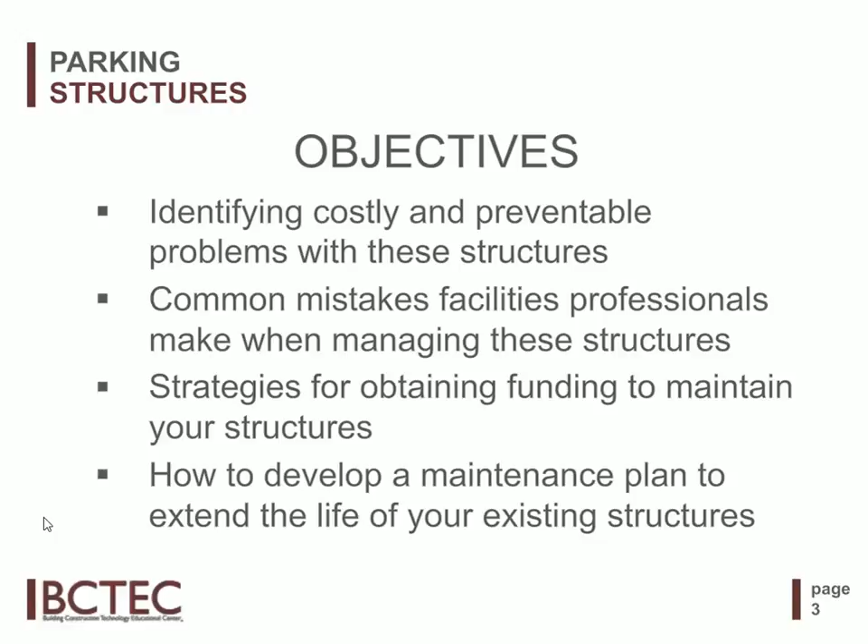So that's what Russ and I want to do. We really want to make sure that we're totally clear on the common challenges, so preventable problems that we're experiencing with these structures. We want to look at some common mistakes that facilities professionals make in the management of these structures. And we want to look at strategies for obtaining funding for these structures. And then ultimately, to close it, we want to look at how to develop a really solid maintenance plan to extend the life of these structures.

and they have many factors or conditions that are common to each other. Some of the commonalities that we see is, as I said, they are often intermixed, they are multi-use. They also have extremely aggressive deterioration environments. We salt them like crazy to keep people from slipping and falling. They're exposed to any weather that we have out there. This also results in similar problems and similar repair needs.

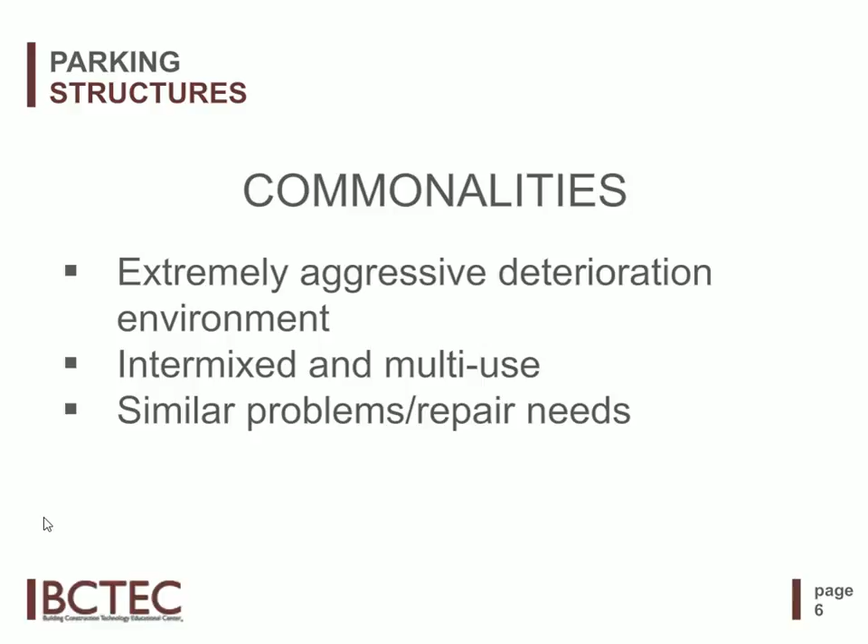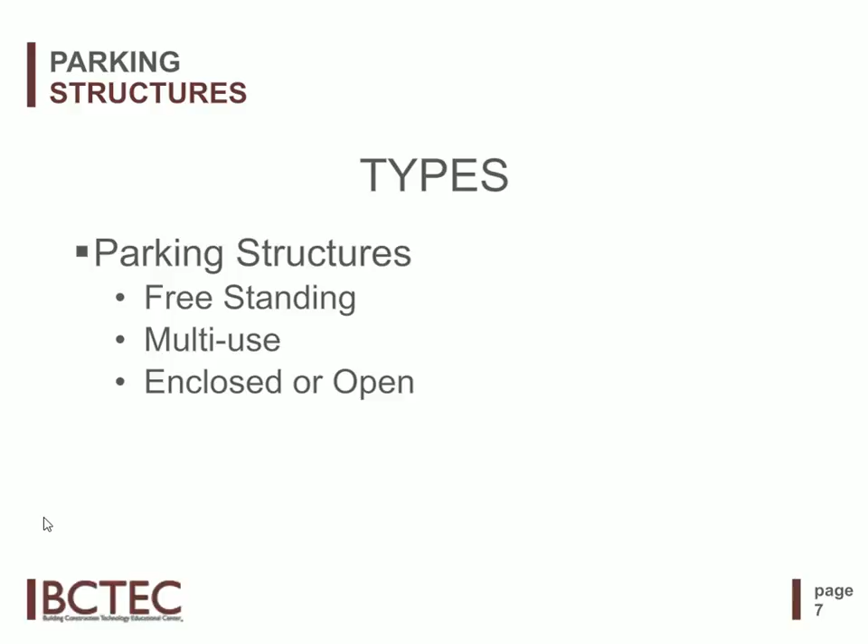So starting with the parking structures, there's a couple of different types. There are the freestanding ones, which are basically on their own. They may occupy a whole city block, a half a city block, whatever, but they are parking ramps, as they're quite often considered, single-use parking only. Other types are multi-use, where other office space or retail or some other use may be incorporated into it also.

Along with that, they may be either open or closed, and what that affects primarily is what the ventilation requirements are for them. Some of the factors that affect which way they go may be the land cost. If it's an urban setting, multi-use are more common now. Age: open freestanding parking structures were common many years ago, but with the land costs it's hard to justify that. Code compliance may require multi-use. The retail demand may require that there be more retail at grade level and so forth. Architectural influences can also affect that.

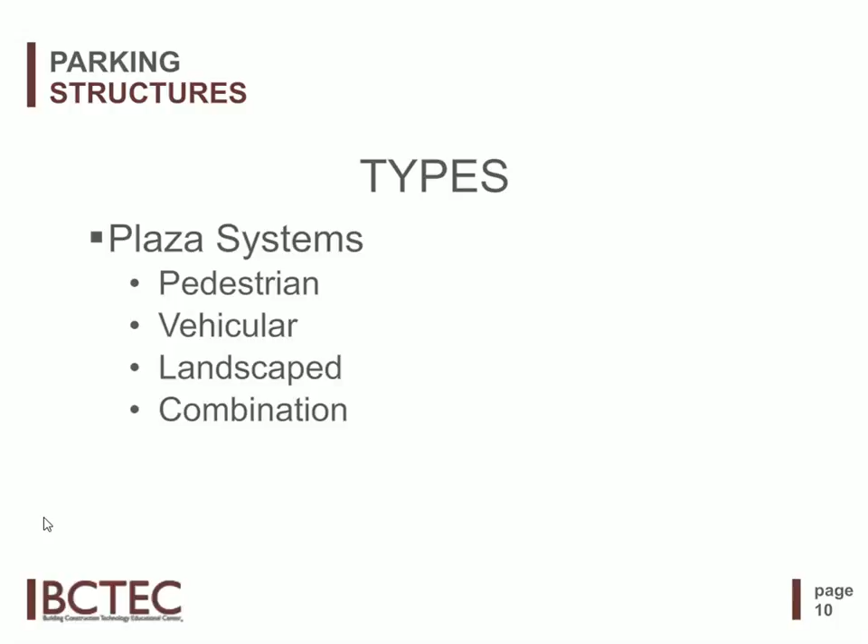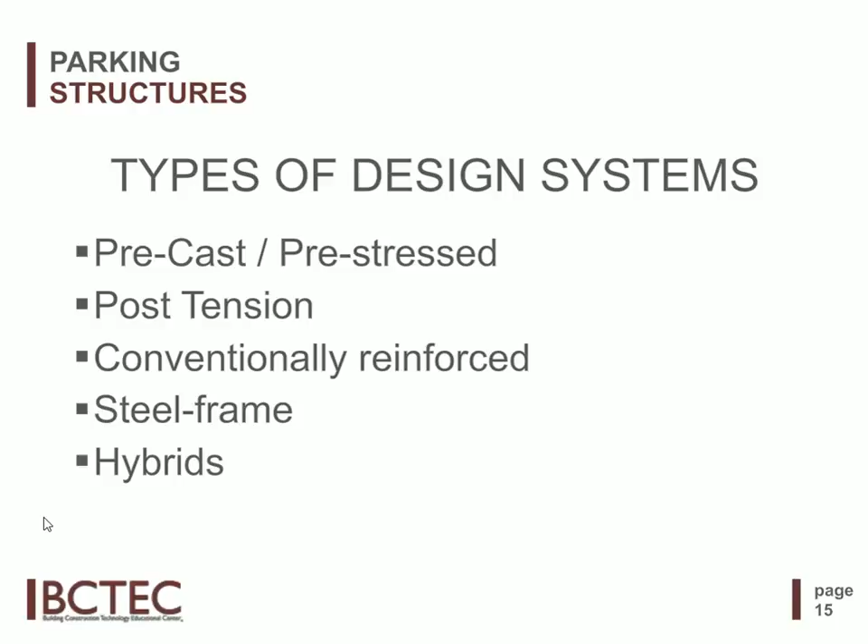Typically, these are a maximum of 30 by 30 foot grid on the columns. They're quite often used where there's office space above, hotel space above, where the column locations for the structure above may dictate the need for where they are down in the garage. These typically are very thick floor slabs, 8 to 14 inches thick. The reinforcement goes in two different directions. And as I said, it's common in older structures or under other structures.

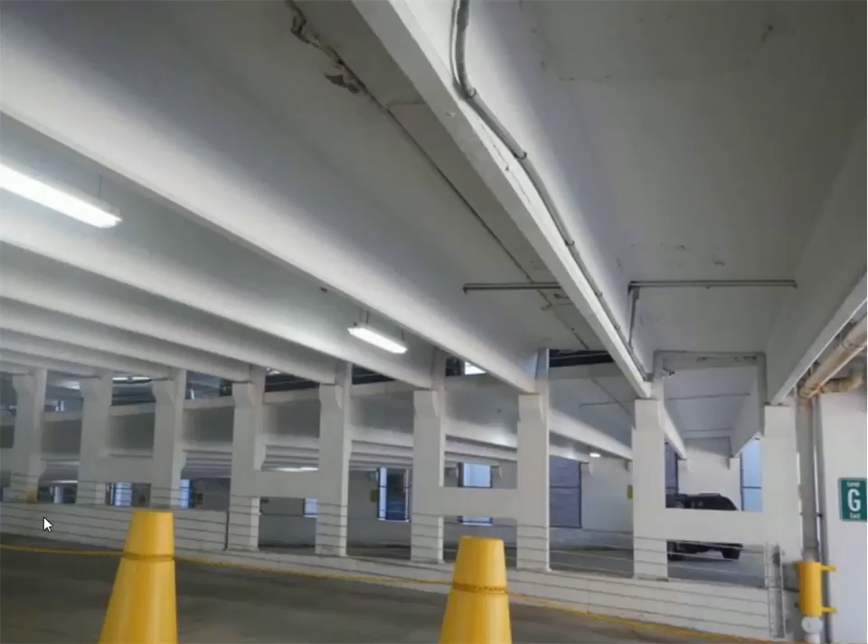This is a precast garage. Precast means that they are individual units that are pre-manufactured elsewhere and shipped to the site for assembly. There's many welded and bolted connections. There may literally be miles of joint sealants in these garages. They typically are a 5 to 6 inch thick floor system. Easiest way to think of these is giant Tinker Toys.

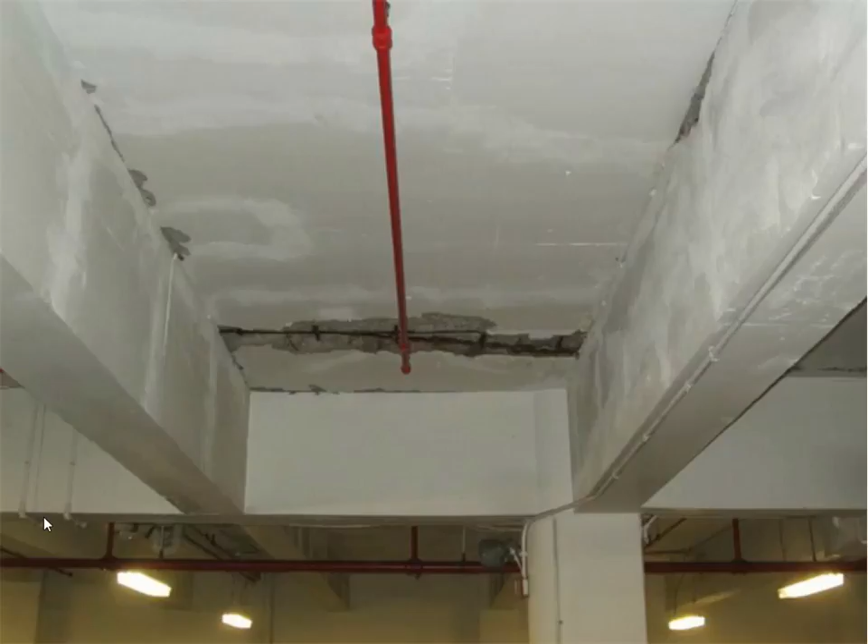This is a cast-in-place beam and slab system, conventionally reinforced. These are identifiable by the close spacing on the beams. These are generally in the 8 to 12 foot spacing on the beams. The floor slabs are generally in the 5 to 8 inch thick range. Conventional steel bars are used to reinforce the floor slab.

That's as opposed to this, which is a cast-in-place post-tension reinforced beam and slab system. The biggest identifiable feature here is the much wider spacing on the beams, which opens up the feeling of openness in the garage. You're looking at 20 to 30 foot spacing on those beams. Makes it much easier for light distribution and so forth. These include a high-strength cable buried in the beams and tendons to achieve that.

So some of the common problems that we see in both plazas and parking structures are leakage, concrete deterioration, and salt contamination. And these are actually all interrelated. We'll be seeing more in a minute, but the leakage brings salt into the concrete. The salt in the concrete accelerates deterioration, and it becomes a vicious cycle as the deterioration becomes worse.

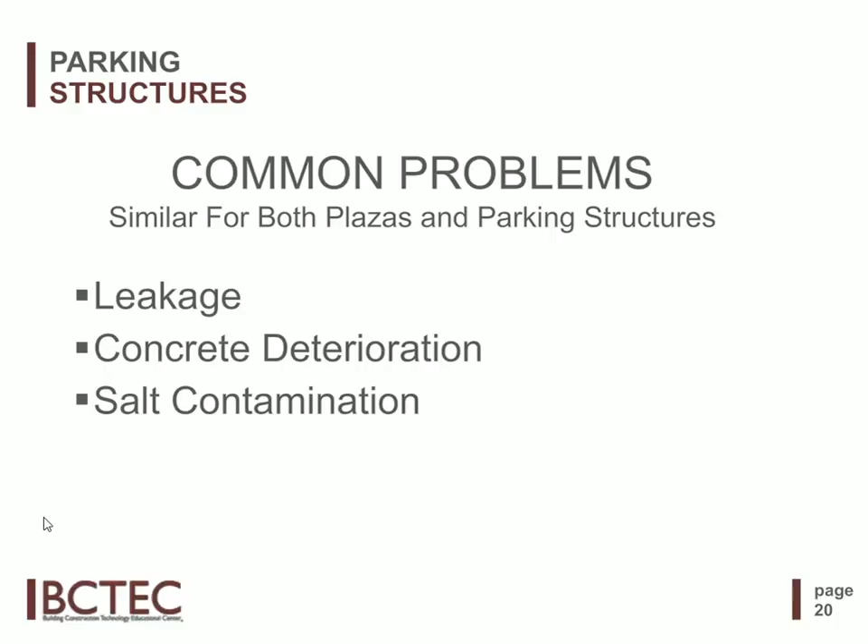Here's a quick overview of some of the types of deterioration. Joint sealant failure. Joints can fail either at the bond, which is an adhesive failure, or within the joint sealant itself, which is a cohesive failure. This can result in leakage down into lower portions of the structure.

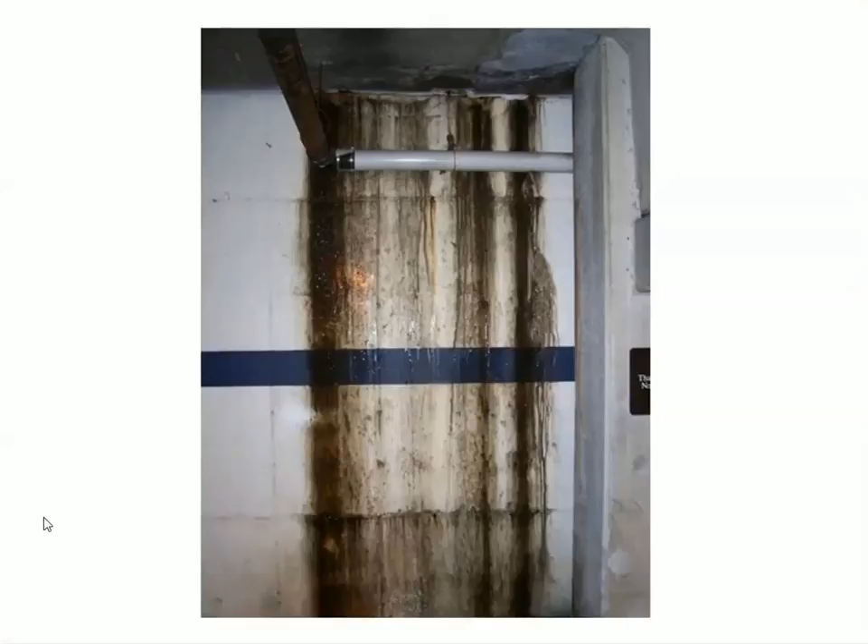The leakage can actually occur at failures within the concrete itself. This is through-slab leakage at fine cracks in the concrete. By the way, this is also an example of another type of beam and slab. This is called a pan joist system, very closely spaced, maybe 2 to 3 feet apart. But you can see that there's actually enough leakage going through there to cause small stalactites to form. Yeah, now that's not recent leakage, Russ. That's long-term ongoing leakage.

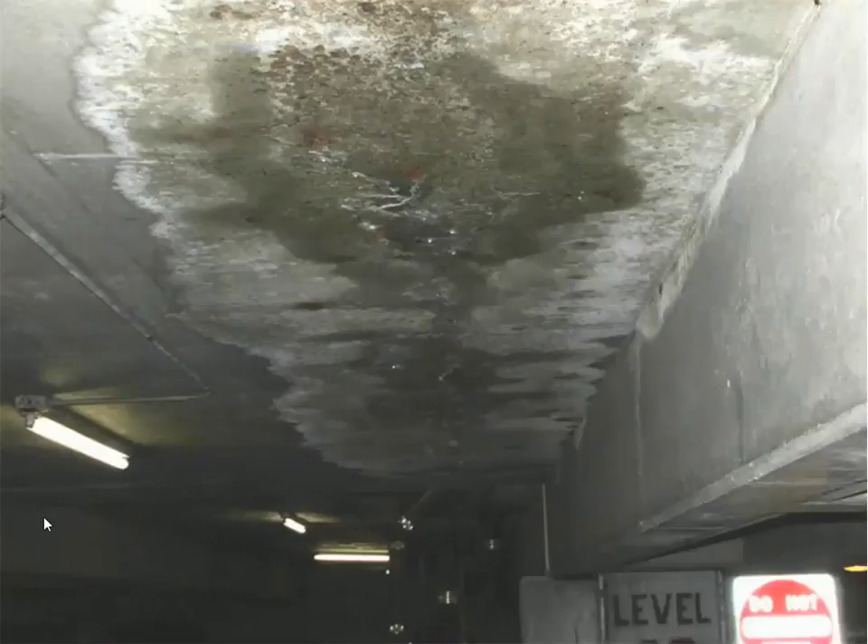A symptom that you may see sooner than that is something like this, which is large area staining on the underside of a floor slab where moisture is coming through fine cracks and so forth, and contaminating it with salts that leave a residue on the surface when the water evaporates.

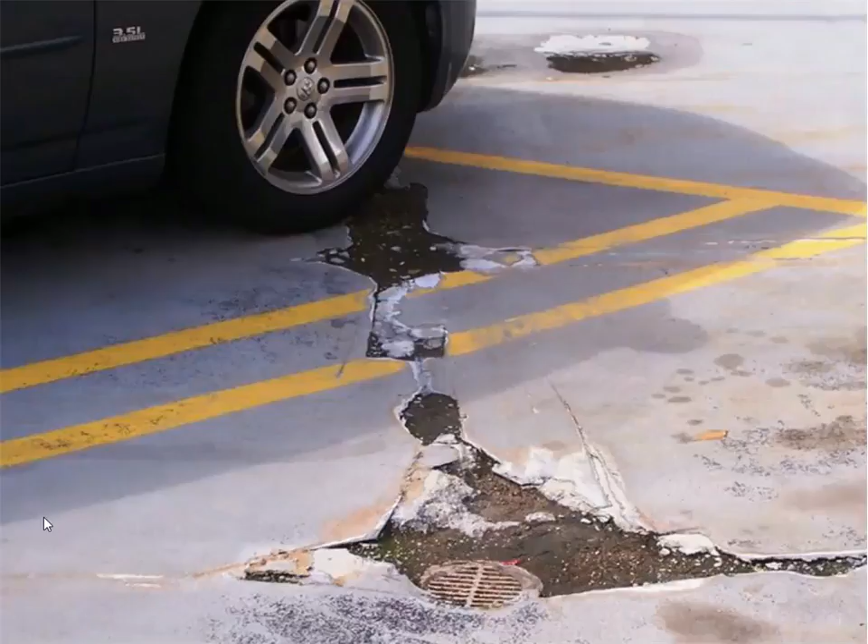So where's the water coming from? You start getting deterioration on the top side, you get cracking. Deterioration like this will act like a reservoir and hold water for a long time, which promotes the water to work its way out through the floor slab. Unfortunately, at this one, the deterioration occurred right at a drain, so the water didn't get a chance to even get into the drain. Now, is there a reason for that, or is it just a coincidence that it's around the drain?

If the drain was set so that the water could not get into it real easily, the water would tend to saturate into the concrete, cause freeze-thaw damage, cause corrosion damage, and progressively become deeper. The drain may have been only an 1/8 to a 1/16 inch above the surface to start with, but as the deterioration progresses, it turns the concrete around it into rubble, which acts like a small lake. So we really need to make sure that there's positive drainage, good drainage. Absolutely.

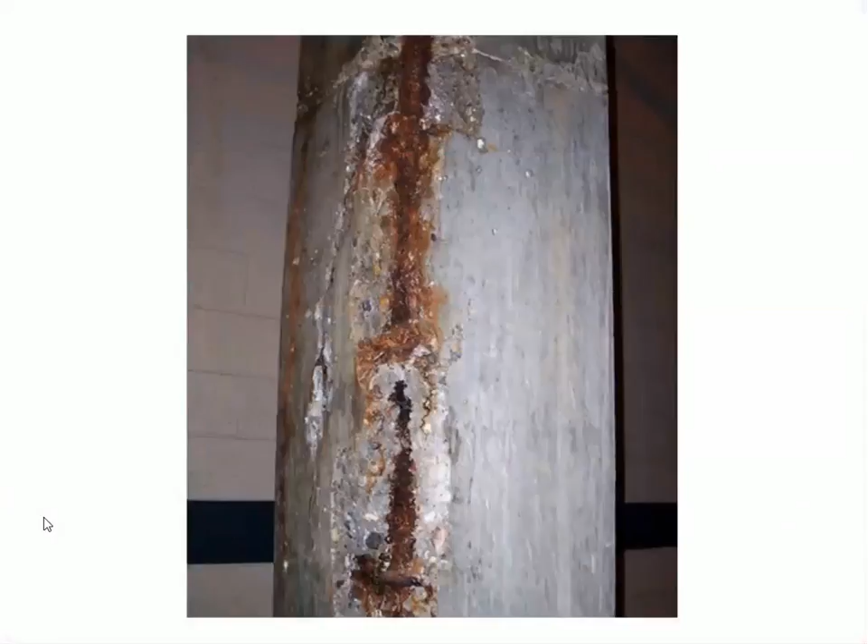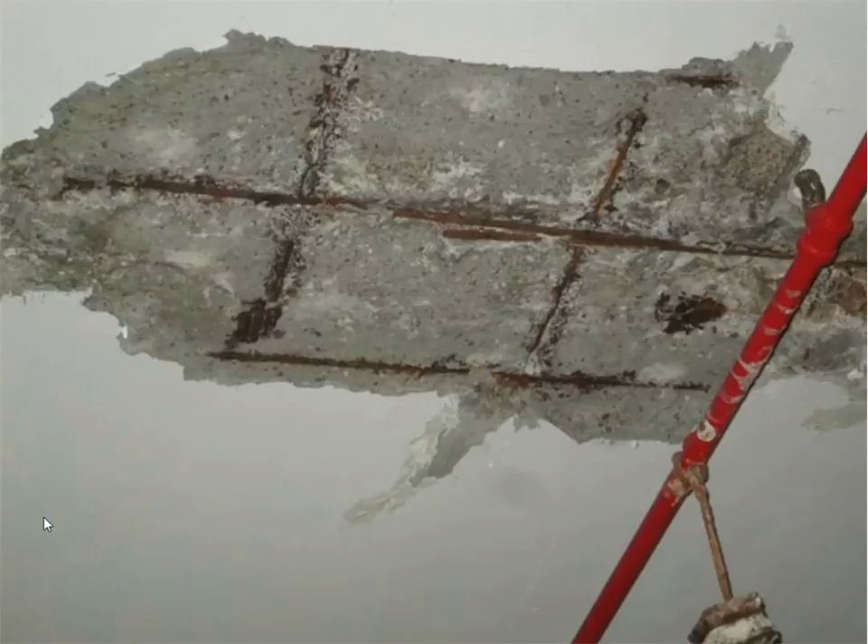The long-term effect of these is that the water coming through the slab starts to affect other structural elements. It can affect the beams, like you saw in some of the other pictures. It can also migrate over and start affecting columns and corroding reinforcing steel in the columns. In here is water coming through to cause corrosion of the bottom reinforcement in a floor slab, which is effectively the ceiling of the floor below. Some of this concrete had fallen out, some of it we ended up taking out as a safety precaution.

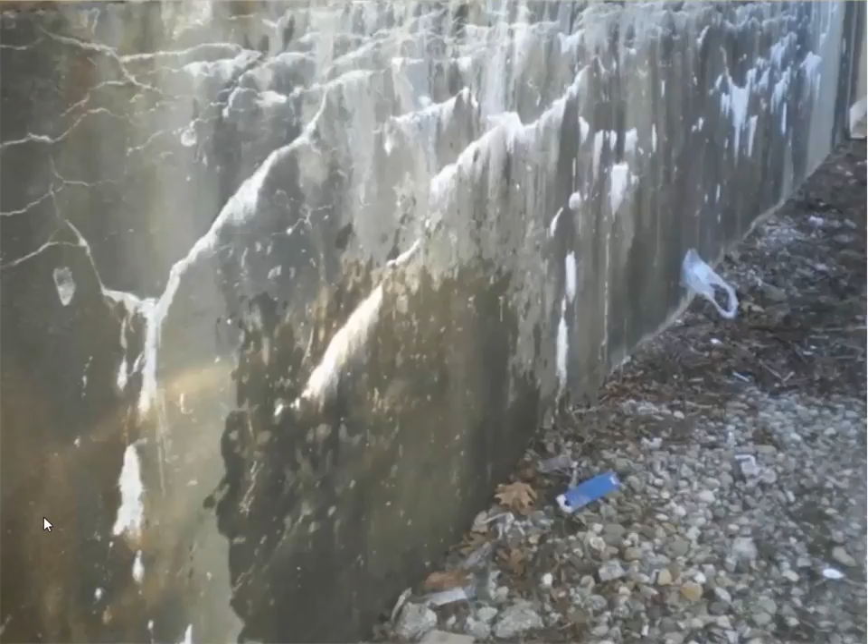Another form would be freeze-thaw deterioration. When moisture gets into it, it causes fine cracking when it freezes and expands. In the southwest, a very similar appearance can also come from a chemical reaction with the aggregates called alkali-silica reactivity. Very similar response as far as the deterioration of concrete.

So Russ, most often when problems seem to be noticed, or at least when we get brought in, it's when there's drips, those active leaks, right? Drops, which could be some of those concrete deterioration issues. You've got falling concrete, or an occupant going to and from the parking structure trips and falls. So really those are the three key areas where we're really starting to notice these problems. Yeah, if you think about it, that quite often is also the point at which lawyers are called. That's a good point.

So, why aren't problems noticed earlier or addressed earlier? As far as why they're not noticed earlier, they are quite often hidden. They're not always that noticeable.

Parking structures, the way they're laid out, people very easily become disoriented as far as exactly where in the garage they are. So even if they want to report it, they have difficulty telling you where it is. It's also not a destination for most people. It's just where they're going to put their car on their way to doing something else. It's essentially a utility. It's very easily ignored.

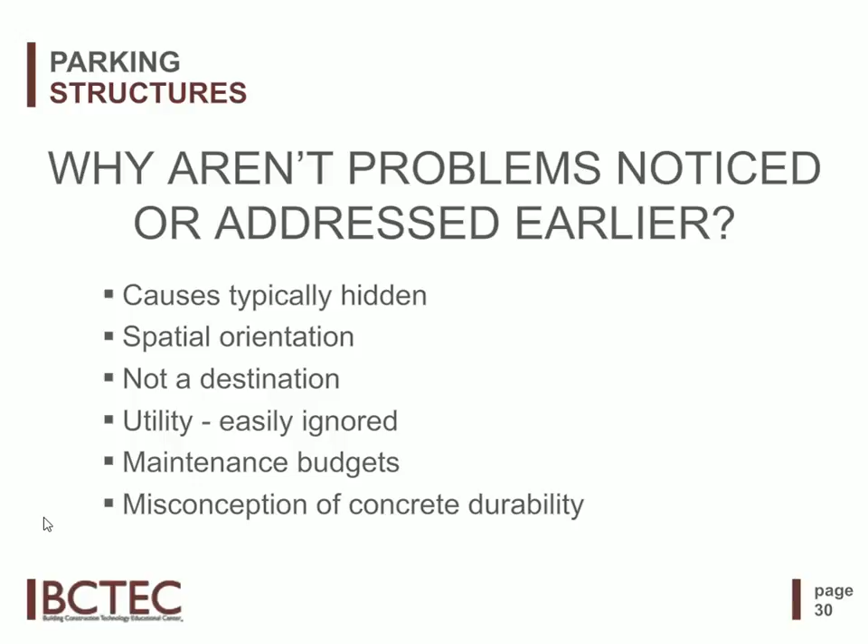As far as why it's not addressed earlier, that usually gets down to two items: either maintenance budgets or misconceptions about the long-term durability of concrete. Despite people knowing that it does deteriorate, there's still a very common thought that it's made of concrete, it'll last forever, and it doesn't.

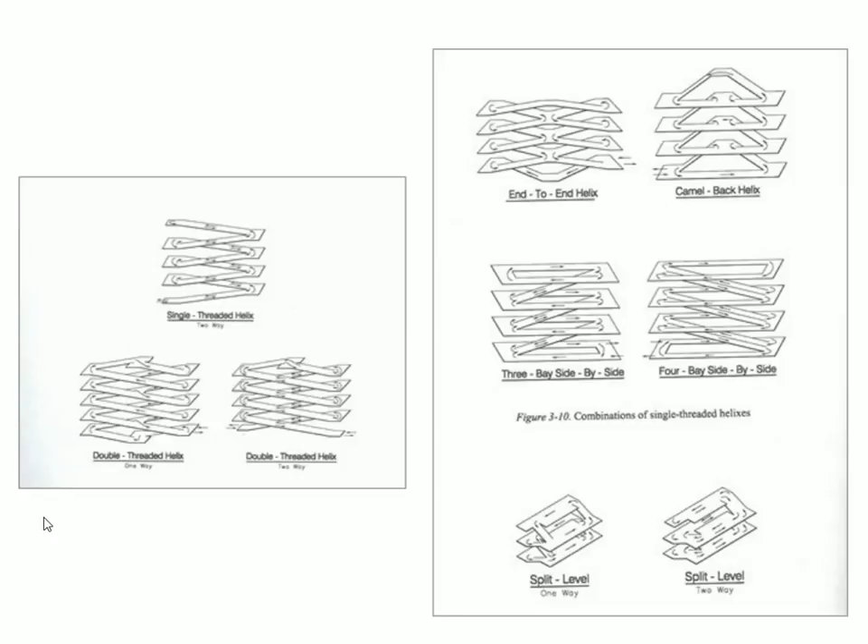Just a quick example of some of the different layouts that can be found in parking garages as far as why people can be disoriented. Some of the most common types include single-threaded helices, double-threaded helices. There's even triple-threaded helices. There's side-by-side helices, camelbacks, end-to-end helices, split levels, all kinds of configurations that are all considered standard and typical and easy to get lost in. Yeah, it can be very complex, very confusing.

Russ, I probably shouldn't mention this, but so confusing, in fact, that even when you and I were visiting that large hospital, parked in that big parking structure to do the evaluation, even you and me, Russ, you're a 30-year parking consultant, structural restoration consultant, it took us 15 minutes to find it. It was pretty complex. But thank you for reminding me of that one. Yep. I almost managed to forget it.

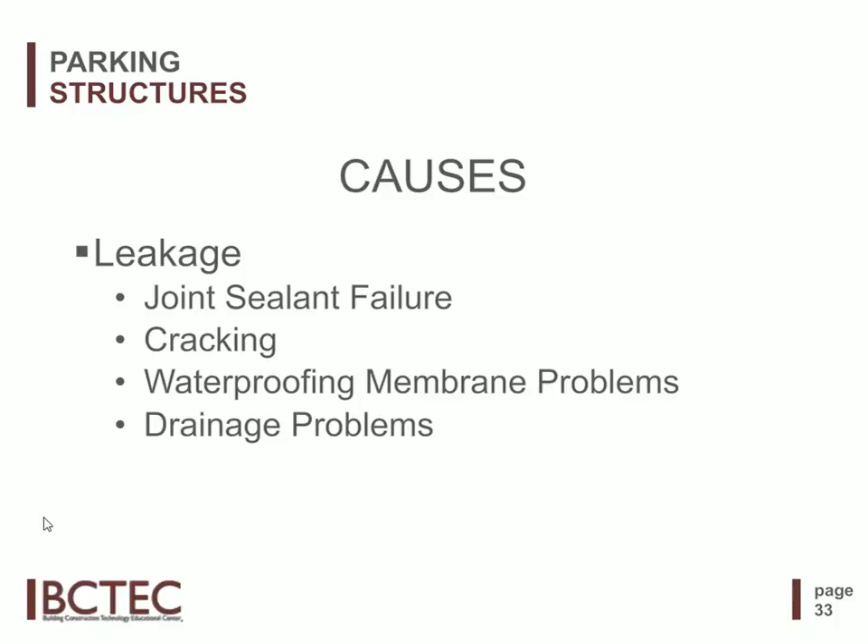Continuing on, what are some of the causes of leakage? Can be joint sealant failure, could be cracking of the concrete itself, could be problems with waterproofing membrane systems, or as we saw in some of the other pictures, drainage problems. As an example of a joint sealant that has totally lost bond, so it's an adhesive failure. There's no bond on either side. You can pick it up with your fingers.

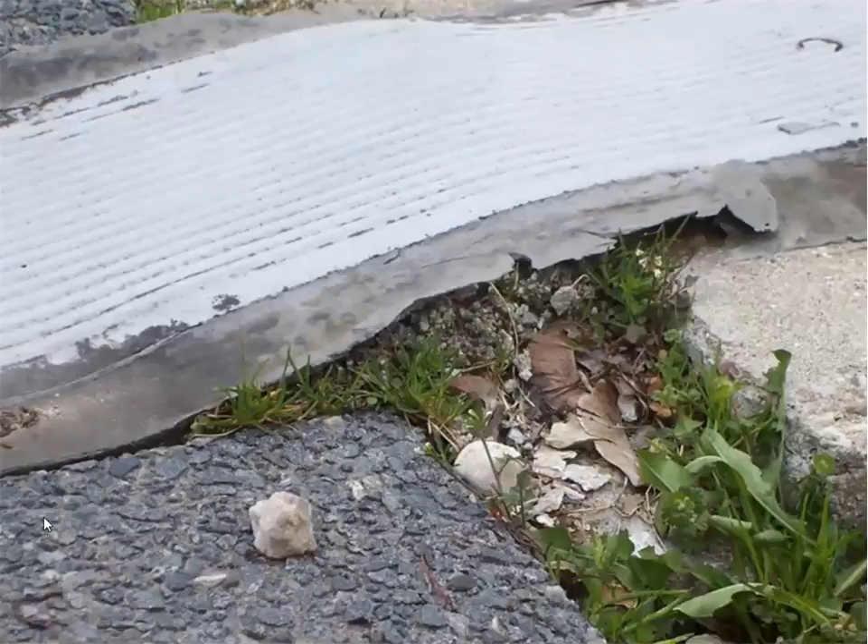This is an example of a joint sealant that has cohesively failed, which means it is split down the middle. And this is an example of one that was just absolutely put in wrong. It actually is spanning between two different sections of two adjoining garages that had soil in between them, and they tried to span across the two systems, over the soil, and into the next one. Interesting.

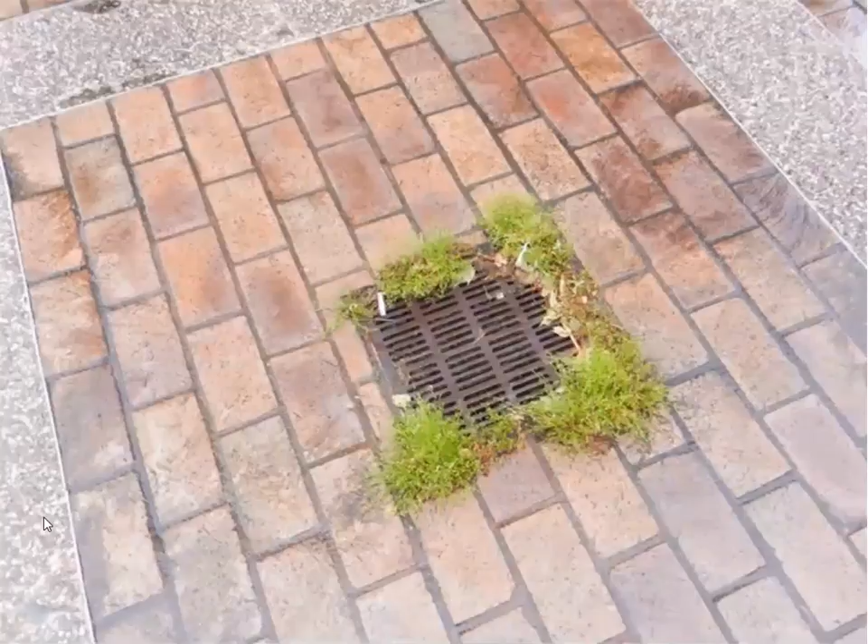As we said earlier, drainage problems create reservoirs of water that exacerbate the problem by keeping the water there for a longer time without draining away. In a plaza system, this is a good example of how you can tell if you have problems with drainage within the plaza system itself. If vegetation can grow up through it, the plaza is holding moisture down where you're not seeing it, and that's what's feeding the roots. So this wasn't like a LEED movement or sustainable movement? No, it was a hidden condition. Most of the rest of the plaza still looked good, but these indications were showing up all over the place. Interesting.

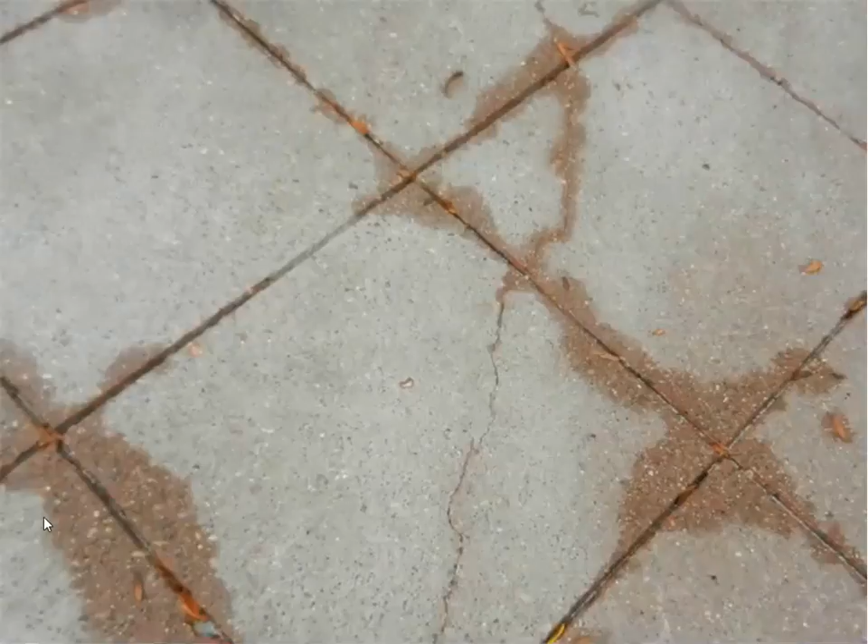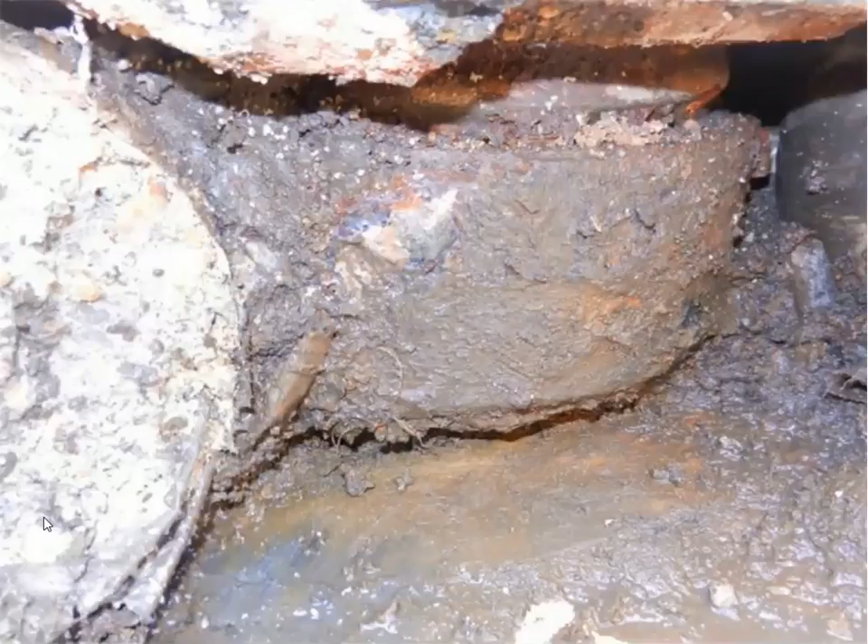The sources of the water may be joint problems. It could be fine cracks. It could be within the drain system itself. This particular one, they were having problems with the drainage. We did some test openings and found that when the drains were installed, in an effort to protect the drain when they poured the concrete, they wrapped the sub-level drainage with burlap and plastic and left it there when they poured the concrete. So it totally blocked off any access of the water down at the membrane level from getting into the drainage system.

Other problems can be not tooling joints soon enough or not placing them quite over where you need them. So you end up with a parallel joint running right alongside the joint you put in. You could also have problems with not having adequate numbers of joints. Concrete, when it cures, naturally shrinks. That's why we put joints in very large structures, very large pours.

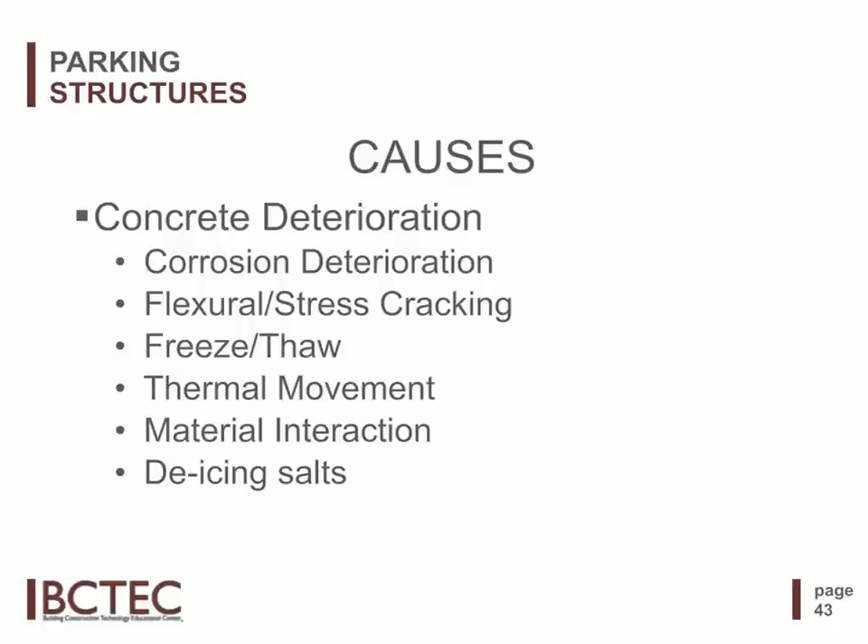A lot of these work together, as we said before. When you start getting joint sealant failures, water is moving into the structure. Quite often it's carrying de-icing salts with it. It reaches embedded connections or embedded reinforcing steel, begins corrosion. When that steel begins to corrode, the corrosion byproduct materials, the rust itself, wants to occupy a volume of approximately 7 times that of the original steel. That puts a lot of expansive pressure and forces on the concrete surrounding it.

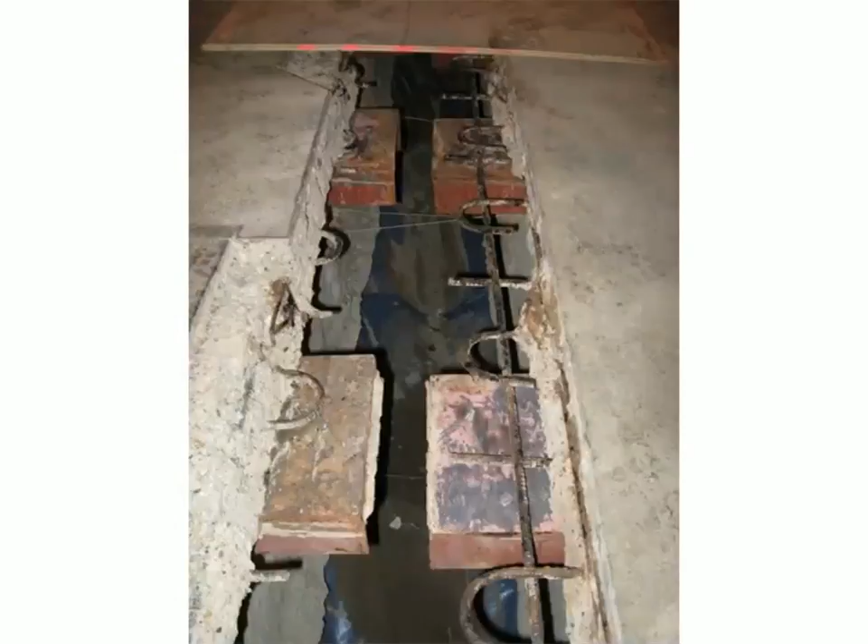Concrete is great in compression, but not so good in tension. If this is allowed to continue and there's enough steel, you can result in problems like this, where the amount of steel at this particular joint, in order to fix it, we had to tear out about a foot back on each side to get in new concrete and anchor it all back together.

Some of the common mistakes that people run into when they're trying to deal with these, lack of expertise is, and we're not talking about lack of expertise of the person managing the structure, it's the lack of expertise of people who are coming in to try and address the problems. Your contractor, your consultant, if they don't have the background in these particular types of problems, they may recommend or perform repairs that are not appropriate or don't address the base cause of the problems.

Yeah, Russ, and I think especially when it comes down to those different types of structures, like you said, we introduced 3 to 4 different types of structures, whether it's precast, post-tension. Those are really different systems, and they need to be treated as such. That's correct.

Going along with that, as far as internally, some of the common mistakes is not keeping copies of the construction documents. A lot of times that's out of your control. If the structure has changed hands multiple times, they may have gotten lost in the sale process. But if at all possible, you want to make sure you keep a copy of those available, because that's the first place that you can go to try and find what a potential cause is for a problem going on.

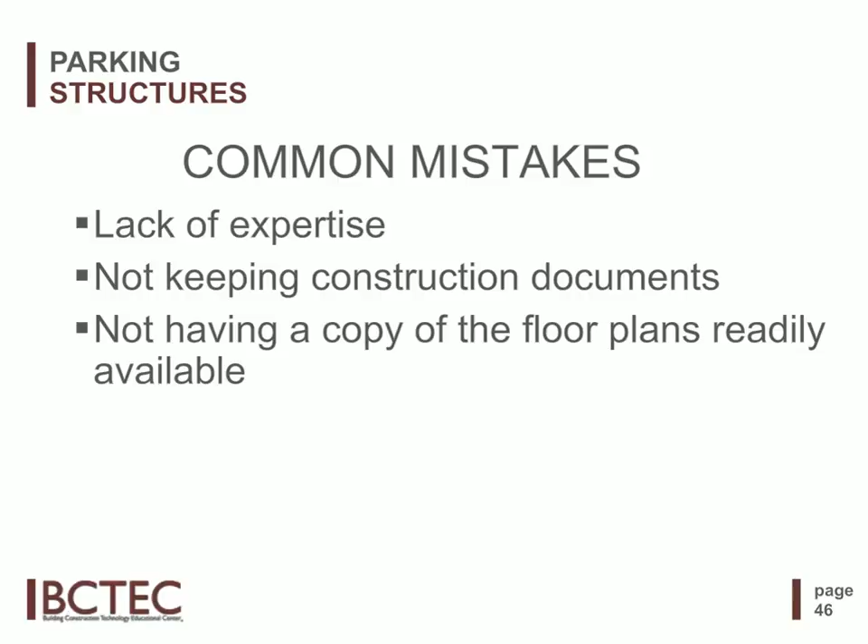The other one is having a copy of floor plans readily available. And even if you don't have the actual construction documents, even hand sketches of a structure keep available in your management office, so when someone comes in and reports a problem, or one of your staff is out working in the garage, notes a problem, they have a place to document where it's occurring. And that way you develop a library of where things are going on. You can identify patterns of problems that are developing.

So what hides problems and makes it difficult to address these? In plazas, if it's a vehicular plaza, it could be the type of paving system that's out there. If it's a pedestrian plaza, you're still going to have pavers or something along those lines that's an architectural feature. The main difference between these is whether it's like a concrete overlay or asphalt overlay or something like that versus individual paver units that are put down. If it's a landscaped one, it could just plain be soil, grass, and trees hiding the problems.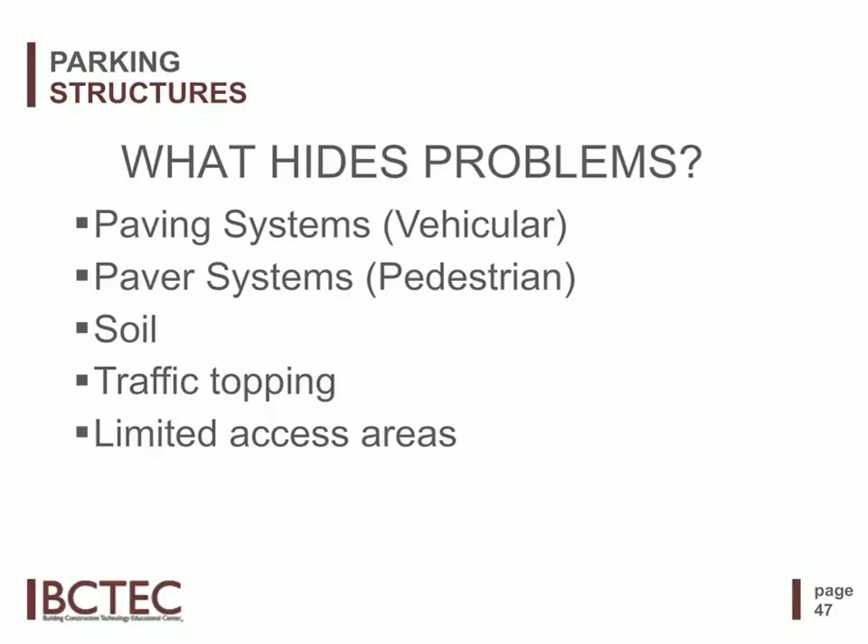Also, the type of waterproofing system that's used. We've run into many occasions where a loose laid waterproofing system was used. If moisture penetrates that membrane system, it can travel a lot of distance before it finds a place to move through the slab. It's very difficult to find the source. In parking structures, it may be a traffic topping. It may be areas that are limited access, mechanical rooms, electrical rooms, and so forth. Could be dripping into there and people aren't seeing it on a regular basis.

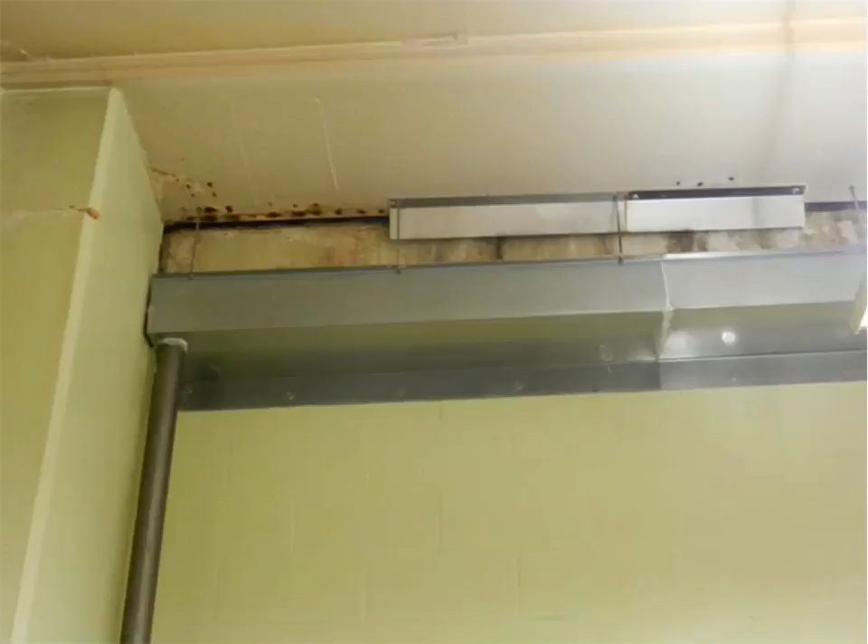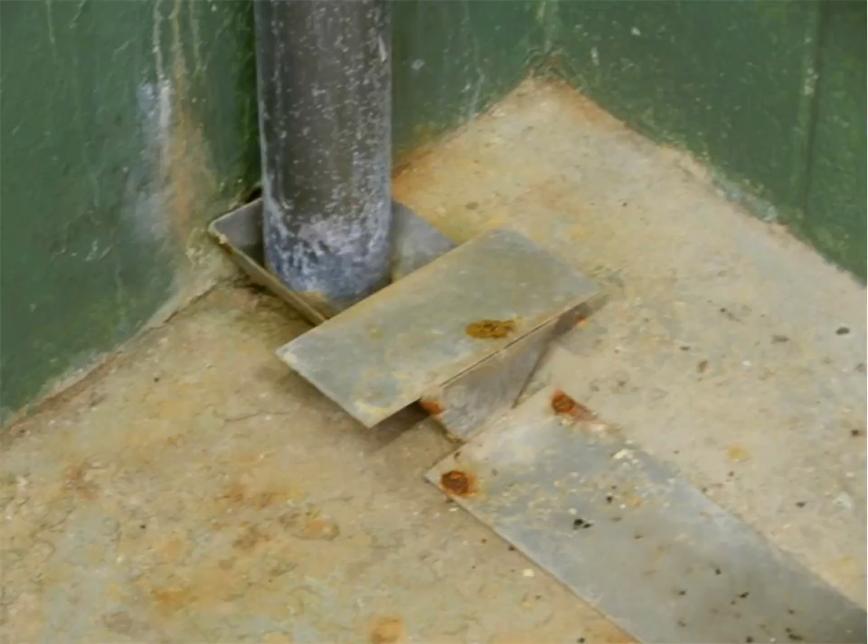They had contractors in there multiple times trying to address the problem. And again, it was the contractor not knowing what was going on and not being able to address it properly. They ended up coming in and putting in a gutter system. It wasn't stopping the water, but it was catching the water before it became too annoying to the person in the office, draining it down and tying it into the footing drains below. So it was a retrofit temporary fix that did not resolve the problem. It just handled some of the symptoms.

What we actually found was going on was that this was a plaza-type system that was used in the parking structure surface. Water was getting in underneath. The drainage system was only set up to take water at the surface level, so the water would actually come down to the bottom edge of that plaza, come up through the floor slab, cracks, and eventually work its way into a drain. But that left about 15 inches of water head that was collecting under the slab, and that was over time working its way through failed joints at the membrane level.

So, Russ, when it comes down to extending the life of structures, I think what we've developed is there's really 3 questions that you need to be asking and really need to be looking for. Number 1 being, initially, do I have a problem? Doing a really proactive evaluation of these types of structures to first just identify, are there any problems? Do I have a problem? After that, you've identified some things, Russ, and it's, I know I have a problem, but how bad is it? What's the extent? Are these widespread issues or are they small maintenance items?

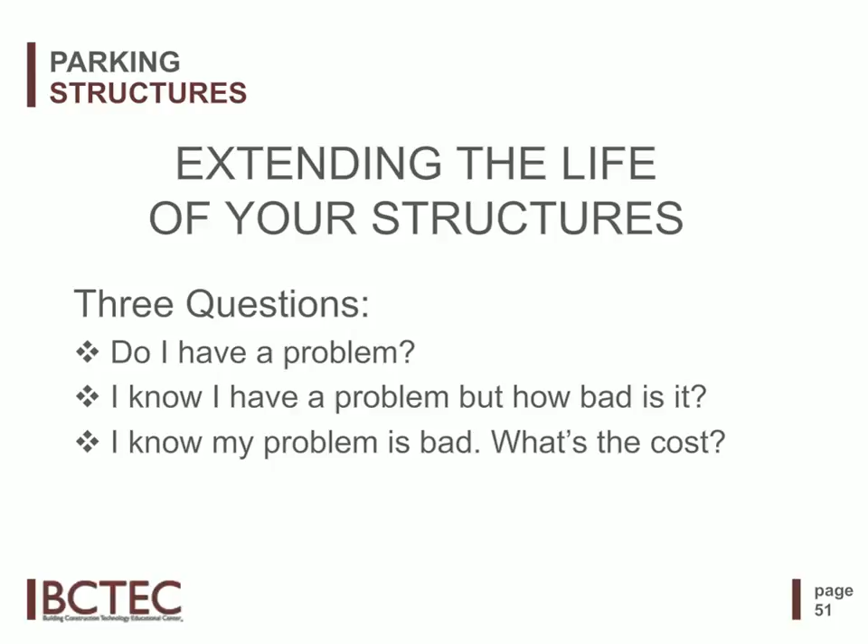And after that, I know I have a problem. I know it's bad. What's the cost? I mean, really, what's it going to take to invest, budget, start planning for it to get these issues remediated and keep these structures in really, really good shape? Okay, so this is the start of developing your long-term maintenance program.

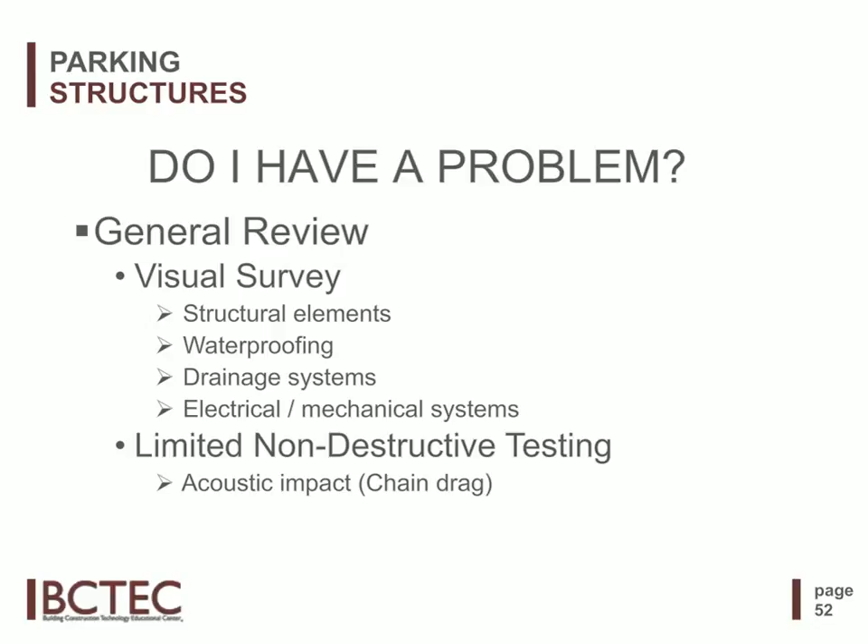So first of all, it may be a relatively new structure. It may be a structure you've just recently purchased. Whatever the reason, you don't have a lot of history on it. You need to identify, do I have a problem? And this is a very basic evaluation. It's a survey. You're looking at the structural elements, what the waterproofing type is, what the drainage system is, the electrical and mechanical systems, limited non-destructive testing. And by that I'm talking what's referred to as a chain drag, or what ASTM refers to as an acoustic impact test.

If you have a little bit more history on it and know you have a problem, but you're not sure how bad it is, then you're looking at a little bit more comprehensive review. And it's going to start with a review of the maintenance history, which goes back to what I was talking about, keeping records of reported problems with floor plans that you have, doing a comprehensive visual review, representative non-destructive testing, so not necessarily chain dragging your whole structure, but taking 20, 30, 40% and then prorating it based on what you find there to establish quantities, doing some limited destructive testing,

and by that I'm referring to possibly small test openings if it's a plaza type system, or you've got some hidden conditions, possibly some core testing to find out what the compressive strength of the concrete is, what the air void structure is, basically what its durability factors are, and chloride ion content testing. And chloride ion content testing and some of these other tests, if you have that information from previous testing, by all means try and keep that where you have it available. It's invaluable in future work and possibly eliminating the need for future testing. All this information is then put together and documented to identify deterioration patterns.

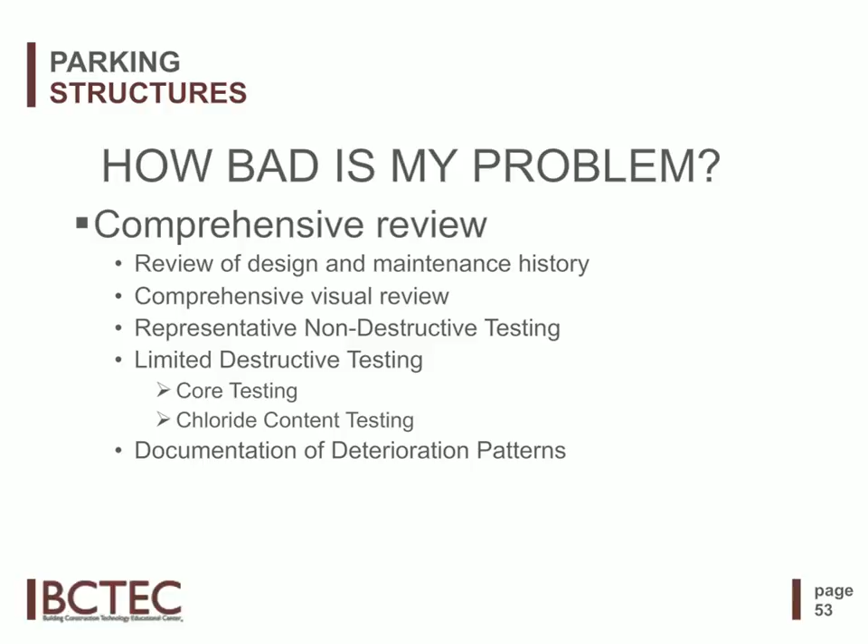If you're at the point where you know you're going to be doing work in the next year, 2 years, whatever, then the cost becomes a lot more important of a factor to narrow it down, get it into a number that you can present for budgeting and cost approval. So if you haven't done some of this before, it may be just an upgrade to that. It may be doing it new for the first time, but it's a comprehensive review of the scope of potential work, increased documentation for quantities, possibly more extensive structural testing depending on what's going on, maybe test excavations, corrosion testing, petrographic analysis, which is, again, a microscopic testing of the concrete components.

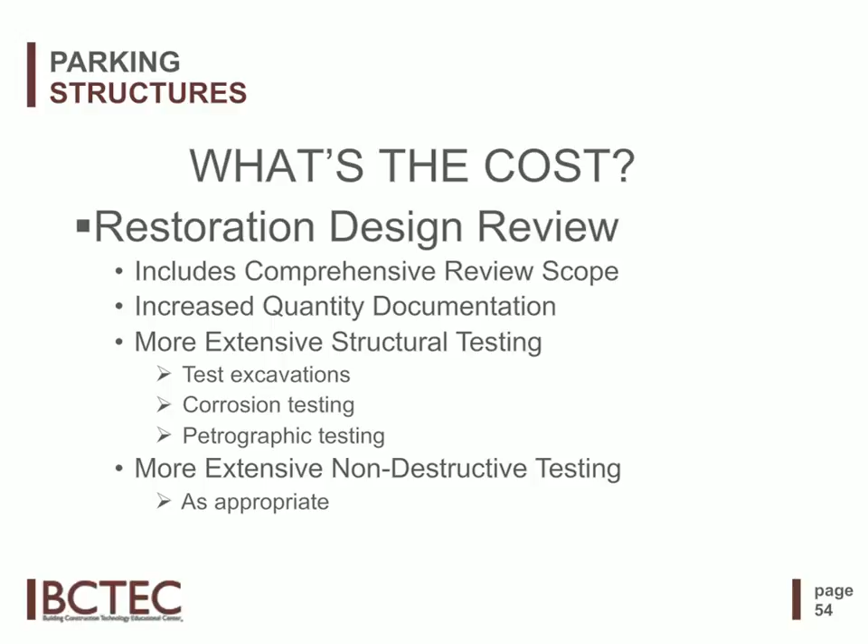Other non-destructive testing, depending on the conditions that are going on, may be appropriate. So, Russ, we'll look at some really good examples, and I just want to spend a little bit of time on this one. It's really how to obtain funding.

What we came up with, through interaction and discussion with a lot of our existing key customers, is a tried and proven process that they've been using to get this funding. We have an actual webinar on this. We've got a write-up on this. It takes an hour to get through all 5 steps, actually. So what we can do is send that out as a follow-up link.

It's really informational. It's really good. It's come from other Fortune 500 customers, key hospitals that have been really successful in getting capital budgets approved. So I'm just going to give the highlights here, but we will send out that link. If you do have an interest in learning more about that 5-step process, I would really encourage you to watch that.

So number one, Russ, it comes down to establishing that relationship with key financial decision makers. Who is it that's making the decisions? Who's going to be a really big influencer on letting us get these parking structure budgets approved? After that, it goes to what you're saying: the surveying and the assessments of the parking structures to really have that solid understanding of what our conditions are, how bad these conditions are, and what we need to do moving forward.

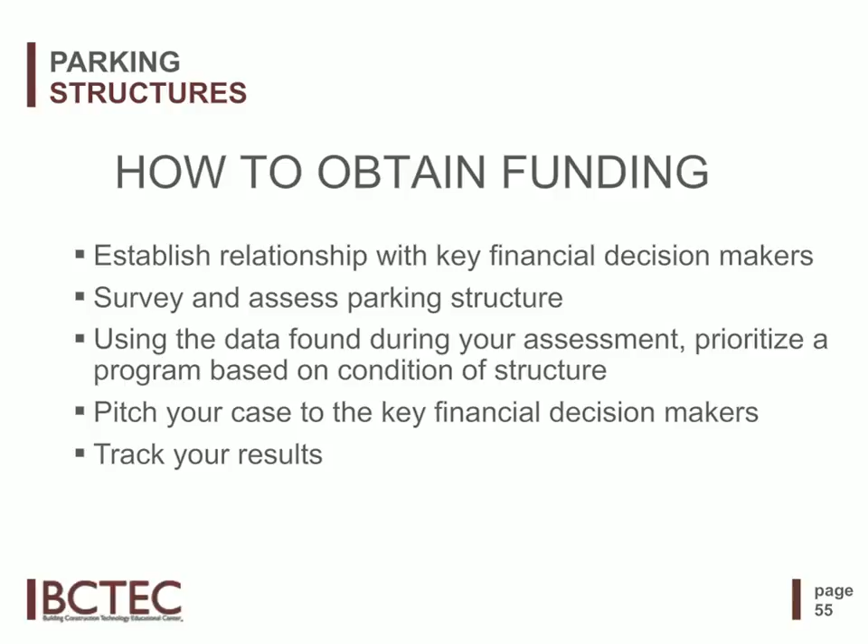Essentially, the way it works is, as you're dragging the chains along, you're swinging this, getting some impact from the chain against the concrete surface. When those drag across where the concrete has started to delaminate, which means it's separating into layers, generally caused by corrosion of embedded steel, those layers act like a drum head and give off a very distinctive sound. And you can get a pretty good feel for how deep those are by the tone of the sound. Yeah. Now, Russ, it's very important to understand the sound, and if you don't mind, I'm going to tell this one as well.

But so Russ was telling me earlier on in his career, he was training a gentleman, an older gentleman, to do this acoustic impact testing, and they were looking at a really, really big parking structure, and they split up. They had a team. They split up. Russ said, okay, you're going to go up, do these top 2 floors. I'm going to go down. I'm going to hit the bottom 3. We'll meet up after lunch, and we'll just kind of compare notes, and we'll see where things are at. And it was a really effective way to do things.

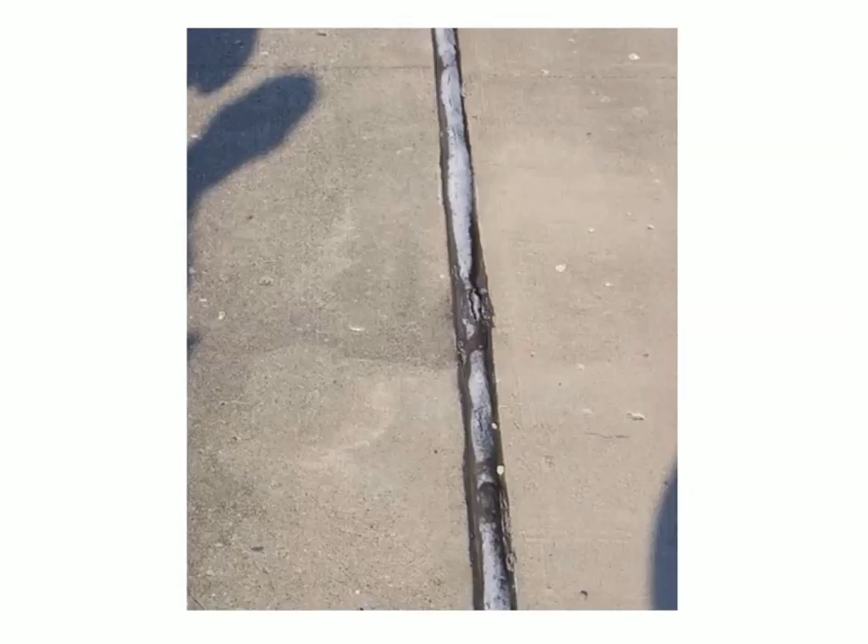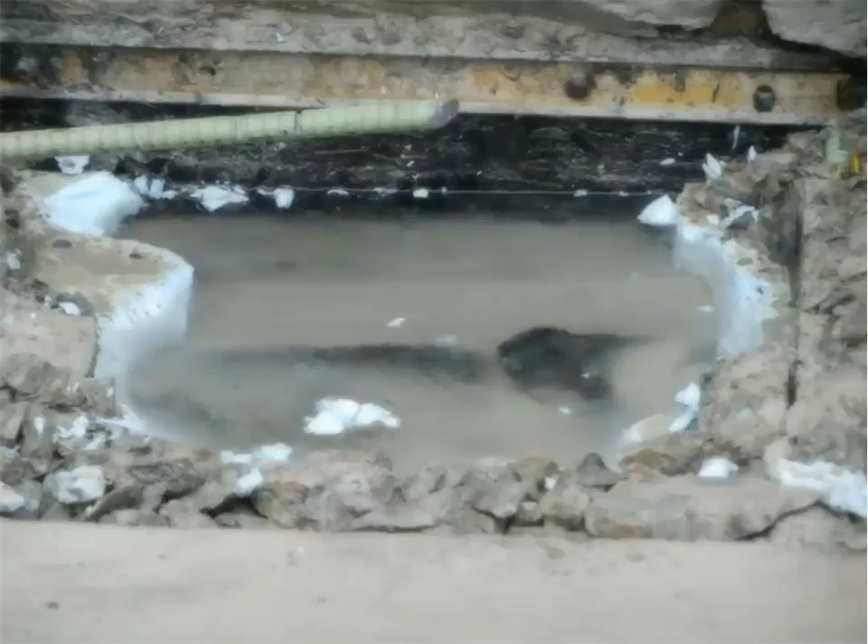So you're going to be documenting concrete deterioration. You're also going to be documenting problems with joint sealants that you notice, documenting conditions where there's water coming through the floor slabs, staining or spalling of the concrete beams. This photo here is actually showing water backing up in a test opening in a plaza system. So that type of information would be documented in an evaluation.

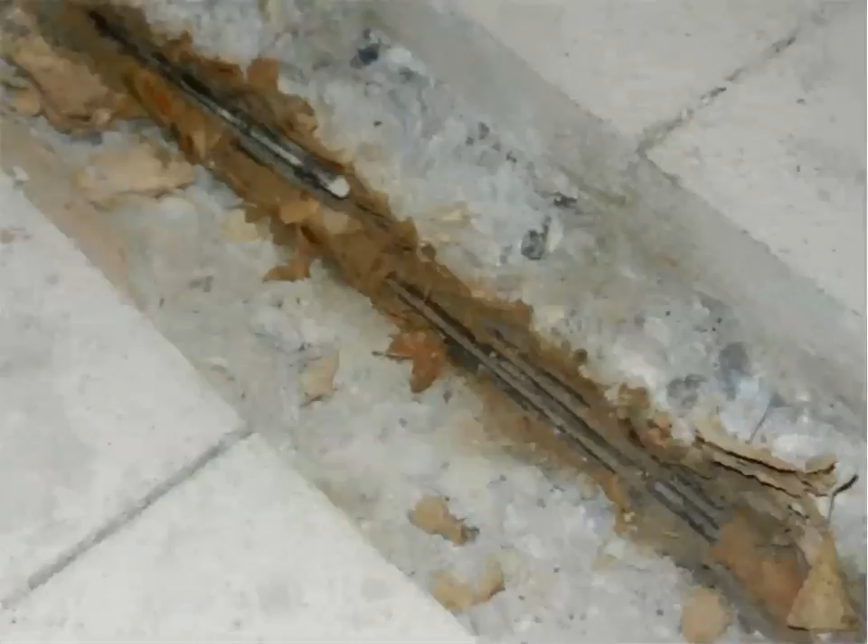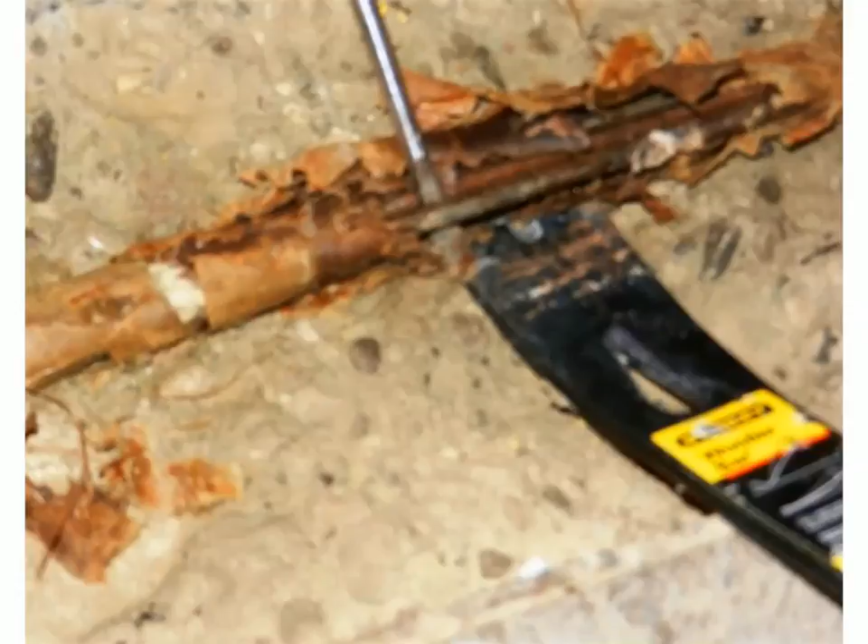Problems with the reinforcement. In this particular case, we're actually going to be looking at the structure that this photo was taken from in a few minutes, but this was an old, early style post-tensioning system. It was what was referred to as a paper wrap button head post-tension system. As you can probably imagine, paper does not provide a tremendous level of protection against corrosion. So you can see, in this one is the same structure, doing testing on it to see if they were still stressed. Essentially, if you can separate the wires with a screwdriver or lift them with a small pry bar, they are no longer in tension.

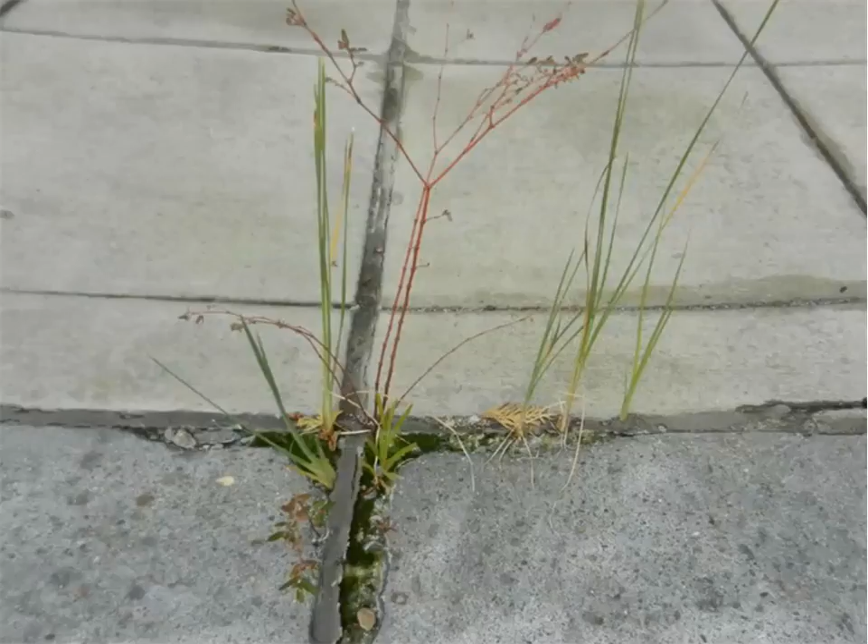Visually, just looking at it, again, this is a plaza area. You got vegetation coming up at the joints. It's an indication you've got water retained in the system, so it's not draining properly. You're getting edge deterioration. No vegetation showing here, but the water at the joints has led to freeze-thaw damage of the concrete alongside the joint.

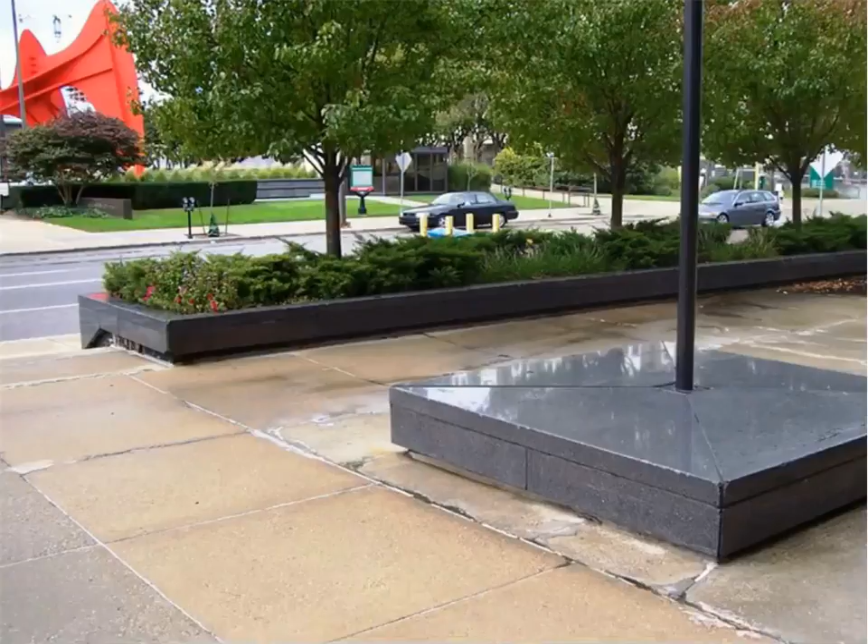Documenting ponding water areas, deterioration of floor panels, of adjacent architectural features, all the things that could give indications as to where the deterioration source is coming from, and helping you identify the quantities associated with it. Again, in plazas, you got varying elevations. How the water is handled and drained out of there can have a big impact. If the waterproofing is continuous and monolithic is a major factor. Retrofits after original construction can cause major problems with continuity of the waterproofing. So all those types of items are what are evaluated during a structural evaluation for you.

Once that information is collected, then it's important to determine what's the proper way to address the problems. And the repair methods that are needed are going to be dependent on what the structural design was. As we talked about, there's precast, there's cast-in-place post-tensioned, there's cast-in-place conventionally reinforced, and so on. These all have different weak points, if you want to call them that, different criteria that affect them. We also need to look at any phasing requirements that may be necessary to maintain access and usage. Also, if it's a paid parking structure, it may be important to look at phasing to maintain cash flow so that you can afford to do the repairs.

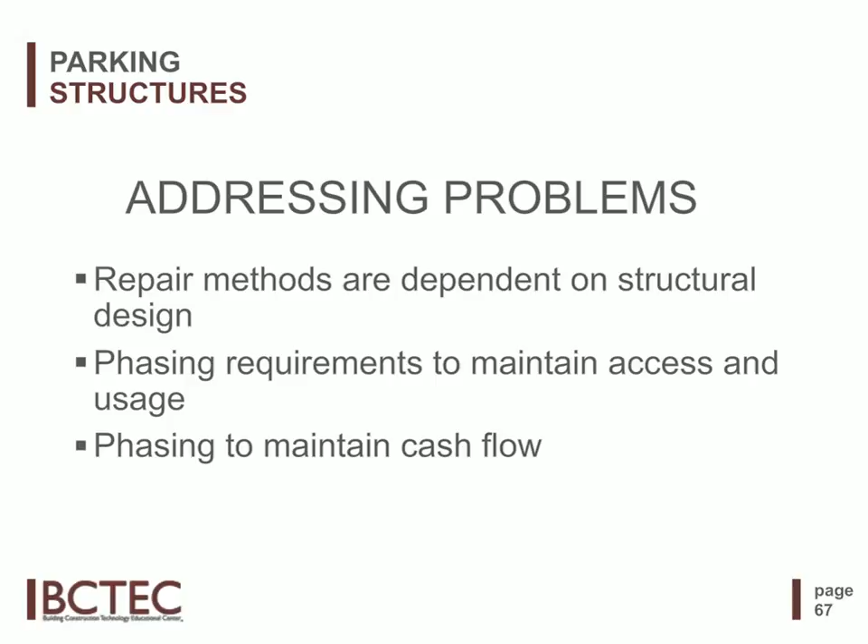So starting off with a blank floor plan, like we were talking about before, keeping one on hand so that you can note things as they're identified. We went through and did this chain drag process. We went and did the visual examinations, undersides of floor slabs, beams, columns, and so forth.

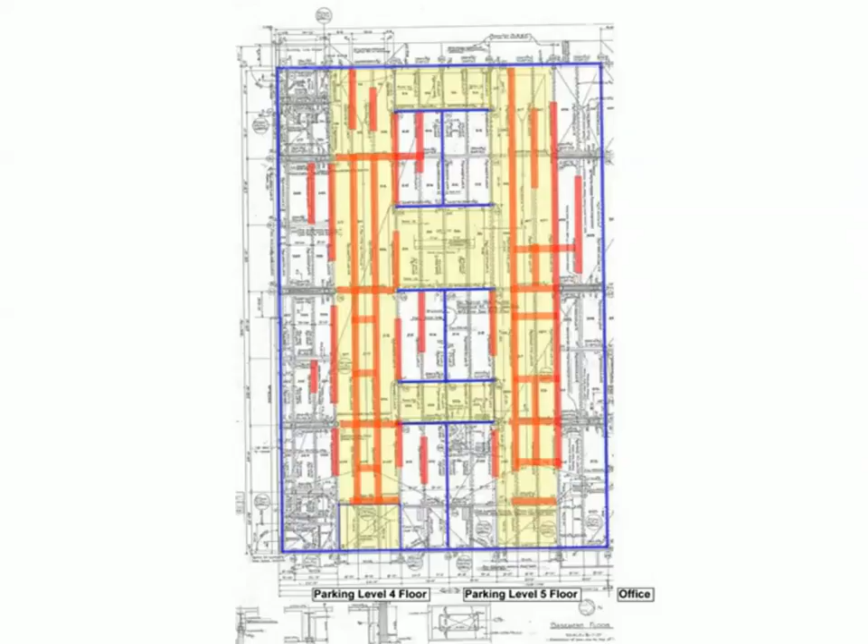And the information that we documented from that showed the areas in yellow are traffic areas, and the areas marked in that reddish orange were areas of major deterioration. And unfortunately, they have a very overlapping configuration there. And what we found when we went in and did some test openings and got into the repairs is that the concrete floor slab was supported by concrete encased steel beams, and the concrete was actually lifting off the beam because of corrosion on the top surface of that beam.

So the repair ended up being, for this particular one, cutting back far enough to get to solid concrete, providing headed anchor studs on the steel beam, casting it all back together and waterproofing.

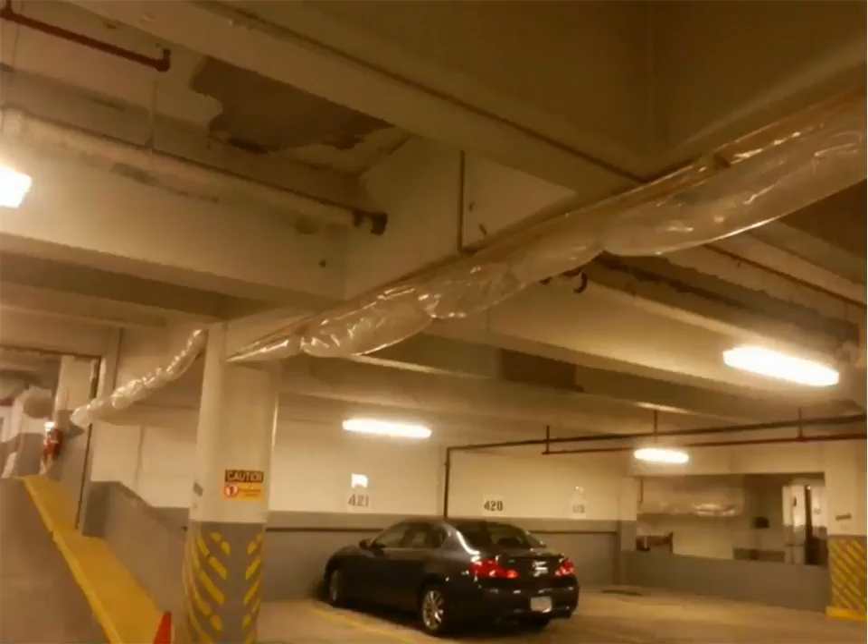In this particular garage, this was a structure that was used primarily by executive suite personnel. They were very concerned about dust control, both for preventing dust getting on other cars that were parked in there while the work was going on, but also they had a major data center in this complex.

So we had to look at a system there that would be removable when traffic had to go during the day, but could be put back in place quickly to allow work to start as soon as vehicles left at the end of the day, and then they worked through the night. So this is a curtain type system that was dropped down while they were working, rolled up during the day.

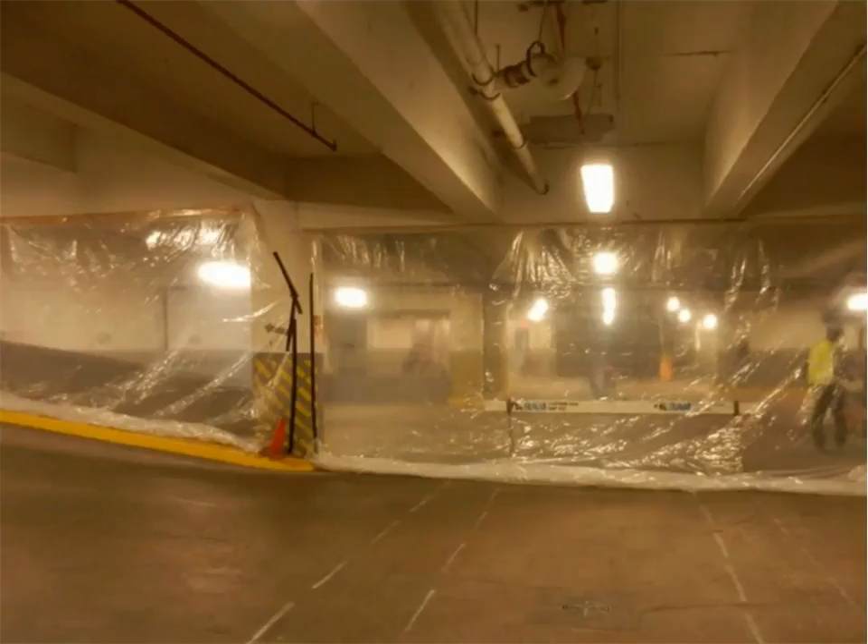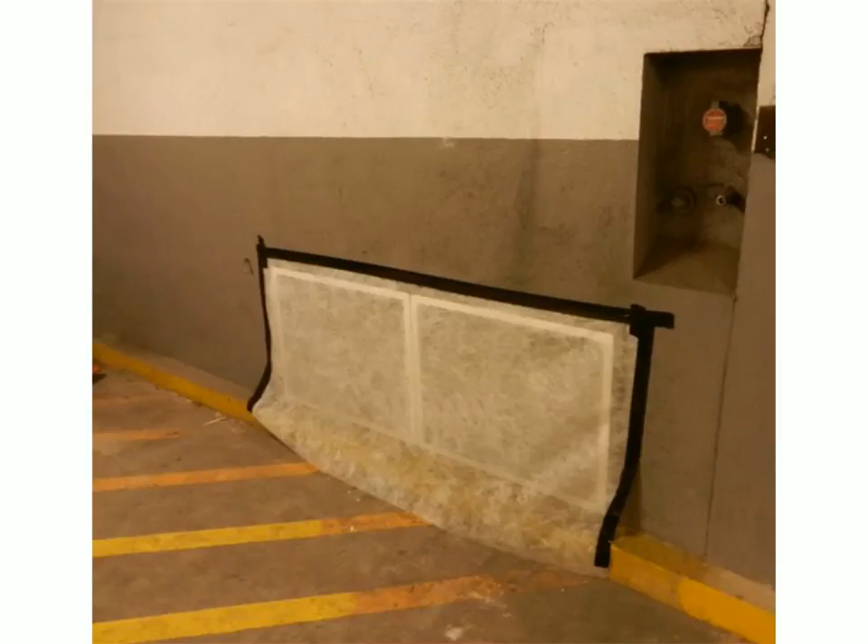We also made sure that protection was provided at all doors, so dust wasn't going around at door jambs and so forth. All HVAC had to be filtered. But no matter what you do, there's always people that don't get the message and leave their car there. I mean, this person may have been on vacation, I don't know, but you have to be prepared to protect vehicles that are still there so that the work can continue.

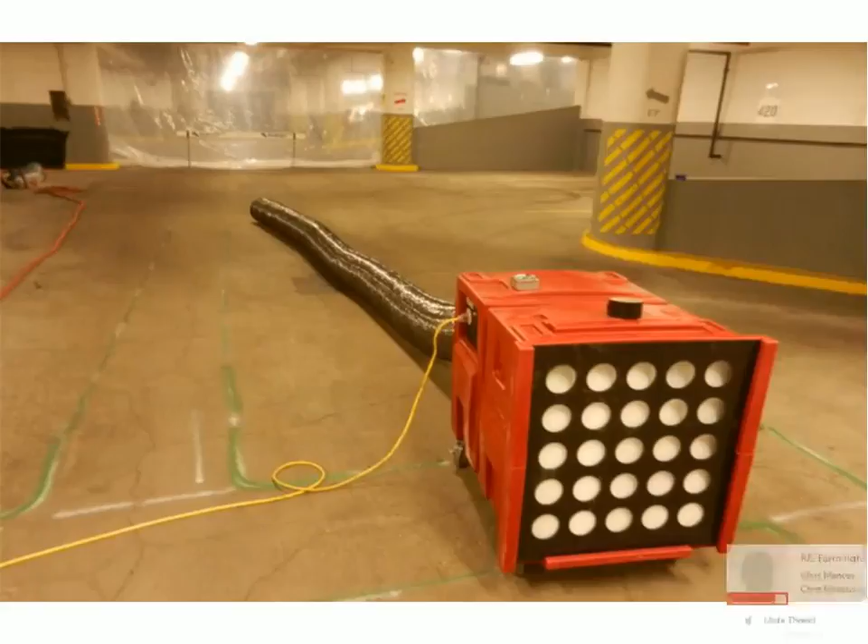In addition, because of the dust barriers, the breathing became very hot and difficult, so powered filtered air systems were used to maintain acceptable breathing conditions for the contractors.

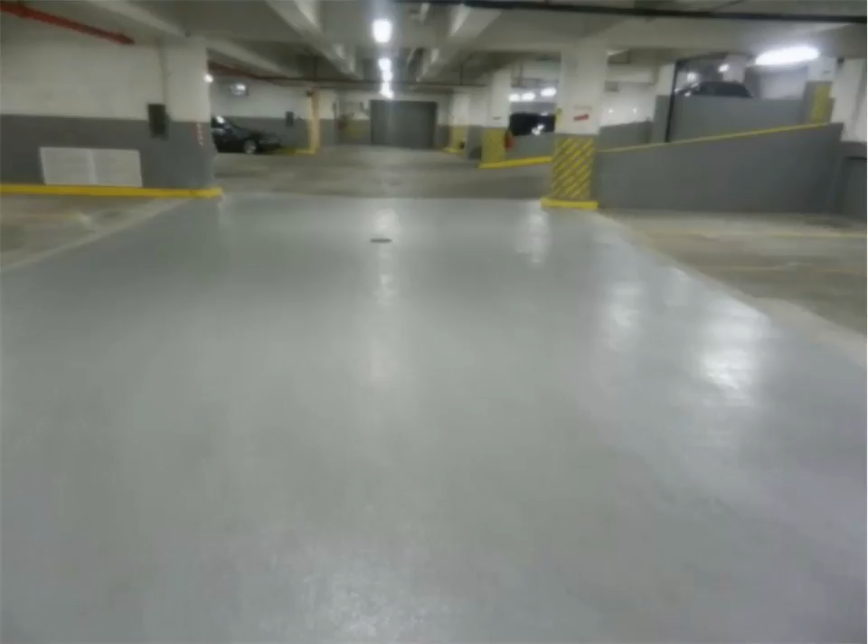When all the work is done, you end up with a very nice looking surface. This particular one had a traffic coating on it in addition; once the concrete structure was taken care of, the waterproof coating was put back in place. Even if minor cracking develops after the fact, because of the type of system it is, the waterproofing membrane gives you long-term protection against leakage.

Looking at the structural factors that impact how you have to do the work, the most extensive areas of deterioration are going to be where there are concentrations of reinforcement. And that goes back to what we talked about earlier, where water carrying salts starts attacking the reinforcing steel, causing corrosion, which breaks apart the concrete.

So the repairs, depending on how far they've gotten, may start with limited spot repairs. If it's been going on for a while, there may be large strip repairs over beams and so forth. It could even go up to as much as full slab replacements.

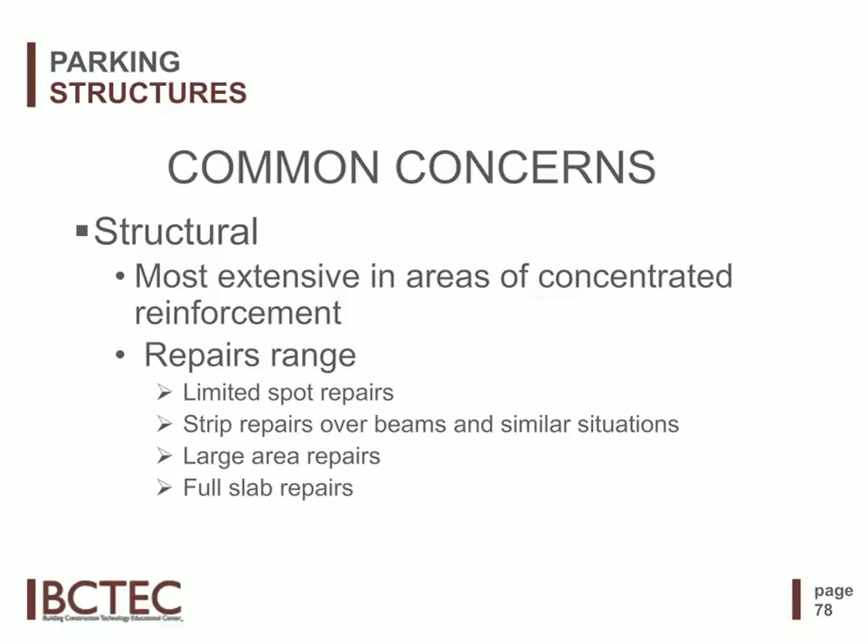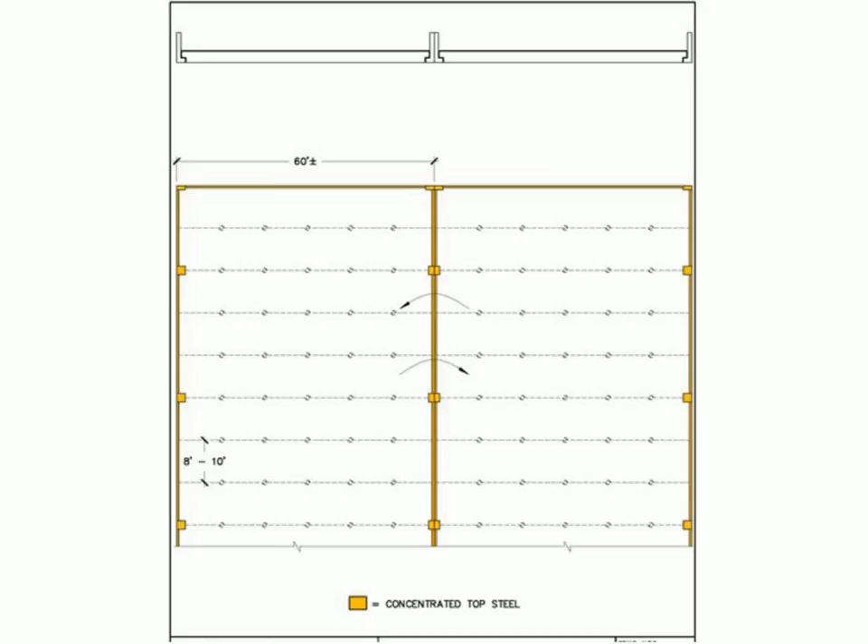Here we're looking at a typical floor plan of a precast parking structure, a double T type design. The areas that are most susceptible on something like this are going to be where the top steel and the connections are to the structural frame, which is going to be at the perimeter, at the interior beam lines, and at the individual connector points along the joints.

In a beam and slab design cast in place, the areas that are going to be most susceptible are over the beam lines, both at the center bay and over the individual bay beams. That's where the reinforcement is at a high point; in between the beams, it's down lower.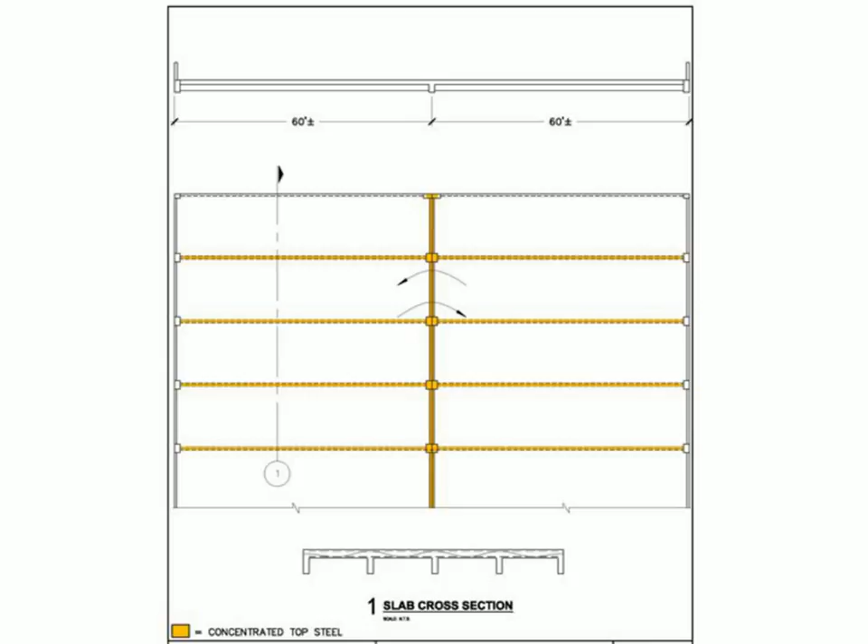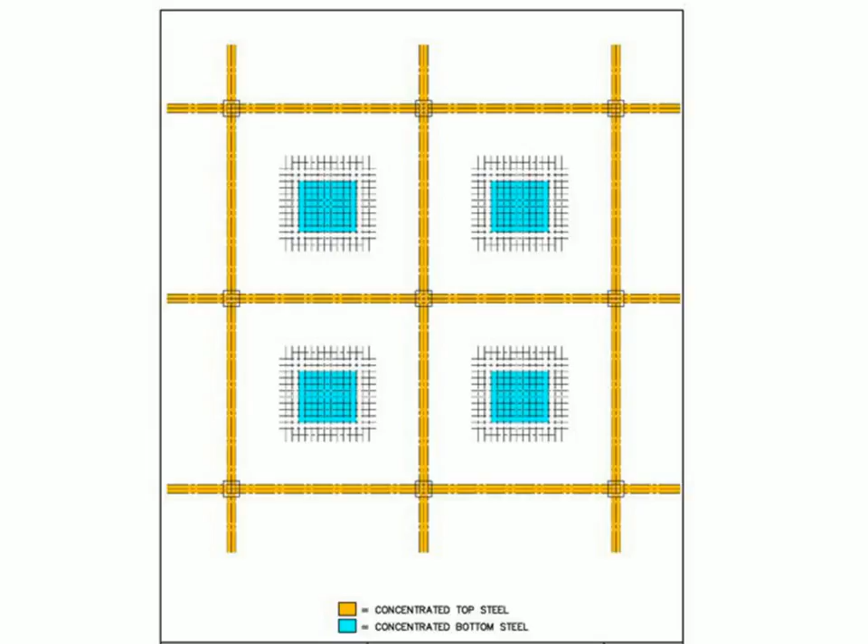In a two-way system, you're actually looking at two different concentrations. Along the beam lines in both directions, there's very high concentrations of steel, and at the center point of the bay on the bottom side, where the blue area shows, there's also high concentrations of steel, so you get a lot of ceiling deterioration in those areas. Structurally, those are both very significant concerns.

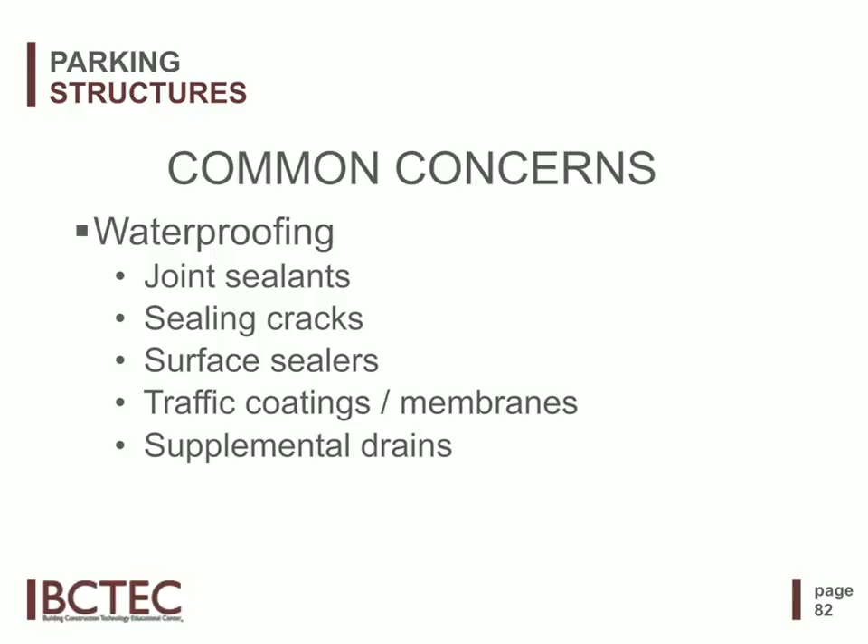In the waterproofing system, joint sealants are probably the biggest factor. Random cracks showing up that are not sealed. Surface sealers can impact leakage. Traffic coatings and membranes. Supplemental drains can also be installed to minimize ponding areas. And these are generally more effective than trying to cast thin wedges of concrete to try and divert the water.

Along joints, as we were showing on some of the earlier pictures, you can get cracking alongside of joints. You may address the main joint itself with a sealant and find that a fine crack has developed alongside it. So depending on conditions, it may be necessary to install traffic coatings or similar materials alongside of joints. This was at an expansion joint.

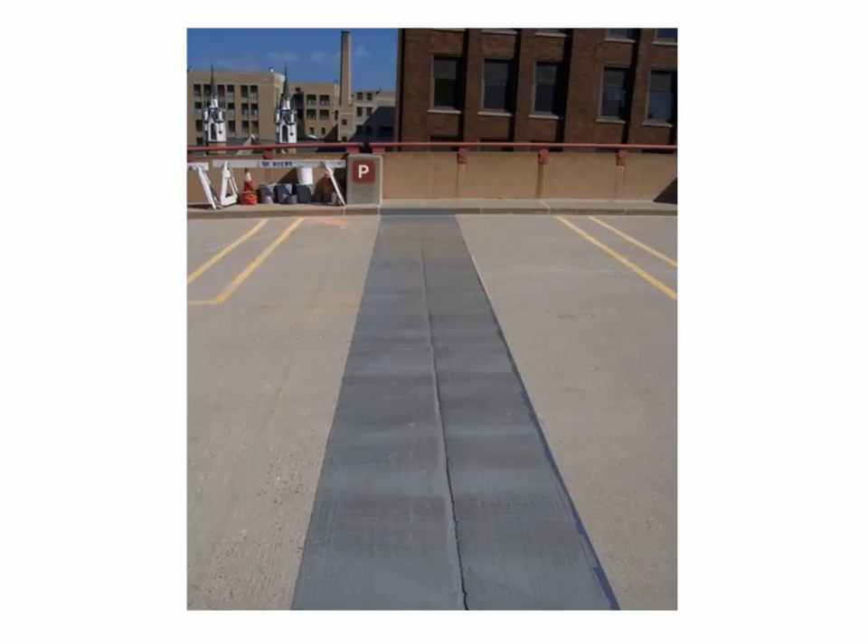This was at T-to-T joints. There was a lot of deterioration going on adjacent to the joint, so we made sure we came in about a foot wide on each side of the joint and took care of that problem.

Other concerns to think about at the surface: you want it to be a non-skid surface. You don't want pedestrians slipping. You don't want cars doing, what do they call it, a Tokyo drift. On the roof level, you want it to be UV resistant. Obviously, you want it to be moisture resistant.

ADA does not really have any specific requirements other than they want it to be non-slip and so forth. There used to be some ASTM standards that addressed non-skid surfaces, but those have actually been repealed because they just were not definitive.

Other things to be aware of would be load issues. If you're looking at a plaza, you don't want to change the weight that's on it by going to a different system without evaluating it. Concrete overlays on a parking structure, without taking that into account, can be a problem. And you also want to make sure that you're maintaining proper drainage slope to drains, adding drains as necessary.

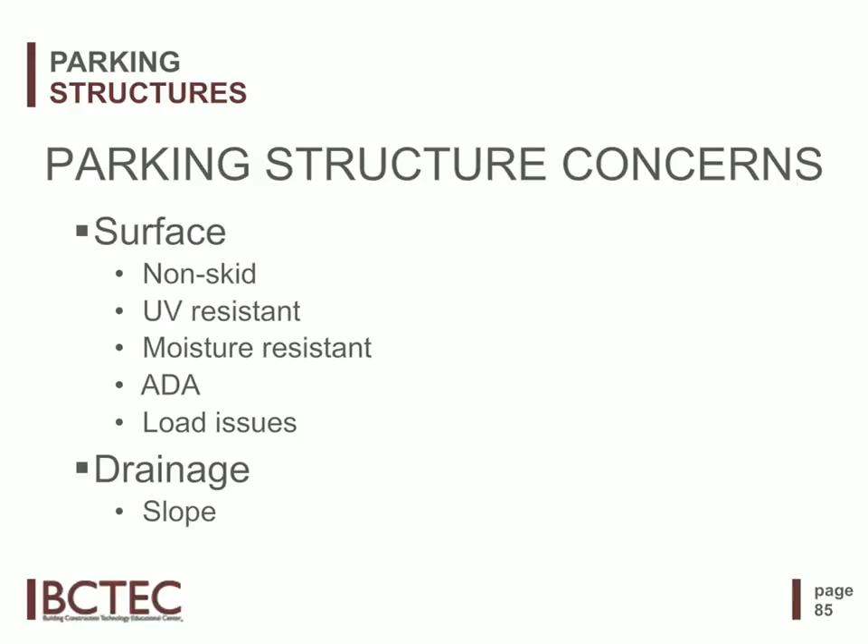One common thing that happens a lot is people will put in raised patches, either intentionally or not. They divert water. If it's intentional, hopefully it's to a drain. Sometimes they're put in just to provide additional protection for reinforcement in a patch. If that's not taken into account, they can actually cause ponding water. You want to make sure the water gets to the drains.

You want to make sure you've got a surface like this that's got some texture to it and has adequate surface roughness to provide the traction that you need.

Plazas in particular, again, we were talking about some of the types of plaza surfaces that are used: soils, protected membranes, paver systems. All of these have different system weights associated with them. If you want to go from a soil to a concrete architectural surface, you've got to make sure that you're balancing that out or providing additional supports as needed if it's going to be heavier.

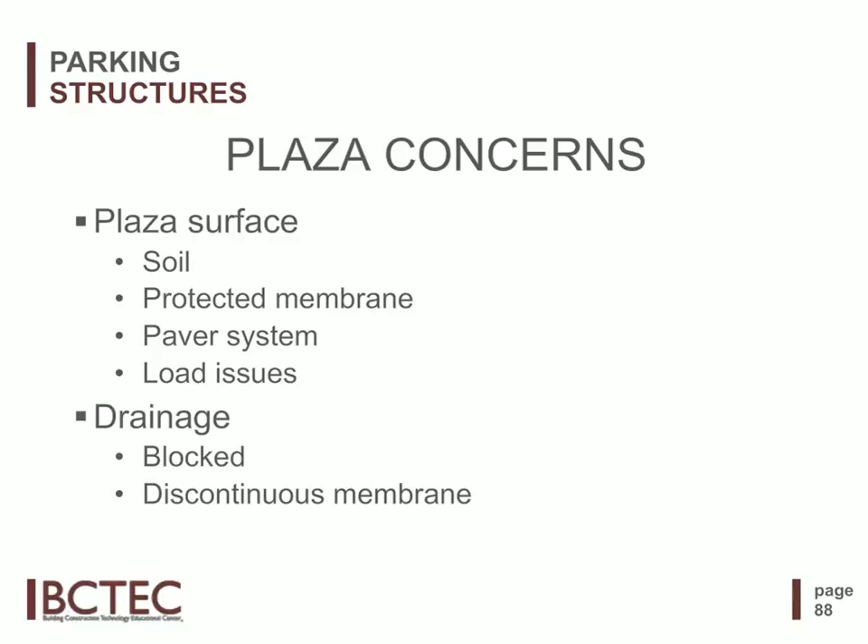Protected membranes, same way. If you're going from a membrane with a lightweight fill on top of it to something that you want to be able to have traffic going over, you've got to make sure the materials are compatible and the loads are compatible. You want to make sure that drainage is not blocked. And as I mentioned earlier, you don't want any discontinuities in the membrane. A continuous uniform membrane is the goal in any waterproofing on a plaza.

So Russ, I think this is a really important point, and I want everyone to just really be aware of it: when we're looking at maintenance planning, developing that internal maintenance program, doing that general review of structures and systems, what types of checklists can we use? How often should we be doing these types of general overviews of parking structures?

Well, there's lots of different checklists out there in the industry, from the National Parking Association, Precast Concrete Institute, various other ones that are just general in nature. You can also develop a checklist that's specific to your project or your structure. And we should be defining what should be looked at daily, weekly or monthly, semi-annually and annually. So there's generally around 4 periods in which you're taking a look at your structures.

And it can be divided down into general housekeeping, preventive maintenance, and system long-term planning. Some of the examples here: daily housekeeping might be looking at trash pickup, elevator cleaning, a lavatory if you have one in the structure, parking equipment maintenance, your gate access and control systems.

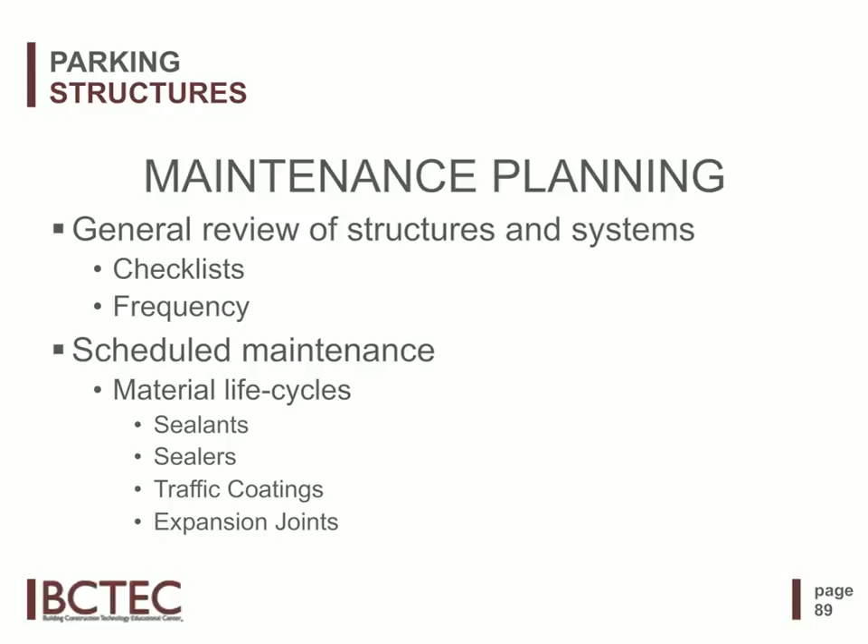So Russ, in closing, let's look at a project profile of a project that you and the team have recently completed. Now, this is a really interesting one. I think it was just done within the last few months, and it was actually a $10 million overall parking structure restoration project. So can you just give us an overview here of the scope of work?

This was a parking structure for a teaching hospital out east. It was originally a 3-level garage built in the mid-60s. In the early 70s, they decided to increase the structure by adding 6 levels of nursing school on top of it. A few years later, they decided they needed some more parking. So in the space between the original garage and the nursing school, they managed to squeeze in 1 more parking level.

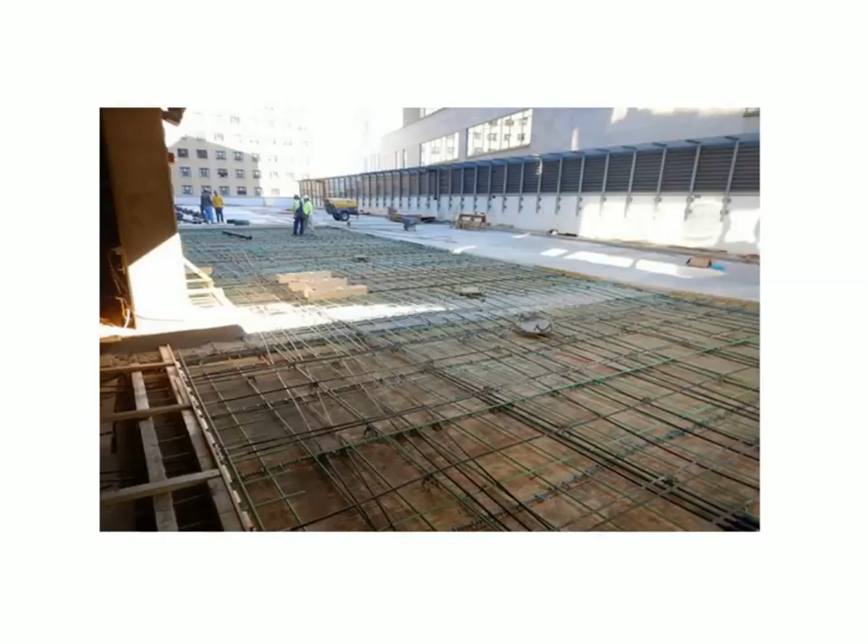Over the years, salts and so forth caused problems with these parking structure floors. Deterioration was becoming very widespread. This actually is the one that we were showing those pictures of the tendons. Unfortunately, we found that almost 60% of the tendons were failed. The repair options were reviewed and discussed with the client, and it was determined that, particularly since they have 6 floors of nursing school above, they could not afford to just demo and rebuild the structure. So we had to selectively demolish the parking floors only, keeping the beams and columns, and reconstruct it with a new post-tensioned floor slab.

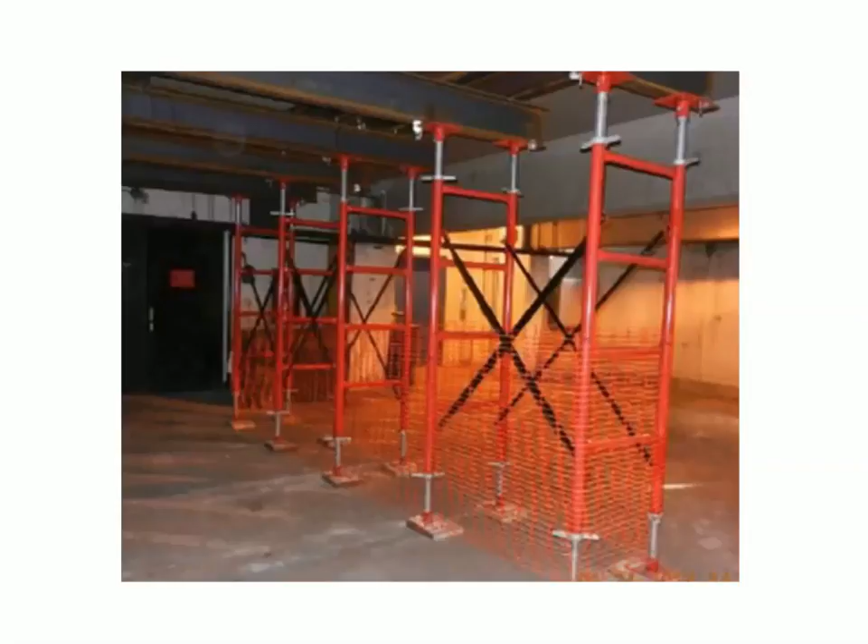As part of this project, they also modified the grade level and actually created a new grade level entry-exit point. As you saw from some of the shoring there, since it took a little time to go from the testing and evaluation stage to having the work under construction, there was an extensive program of temporary shoring just to provide protection and continued usage of this garage.

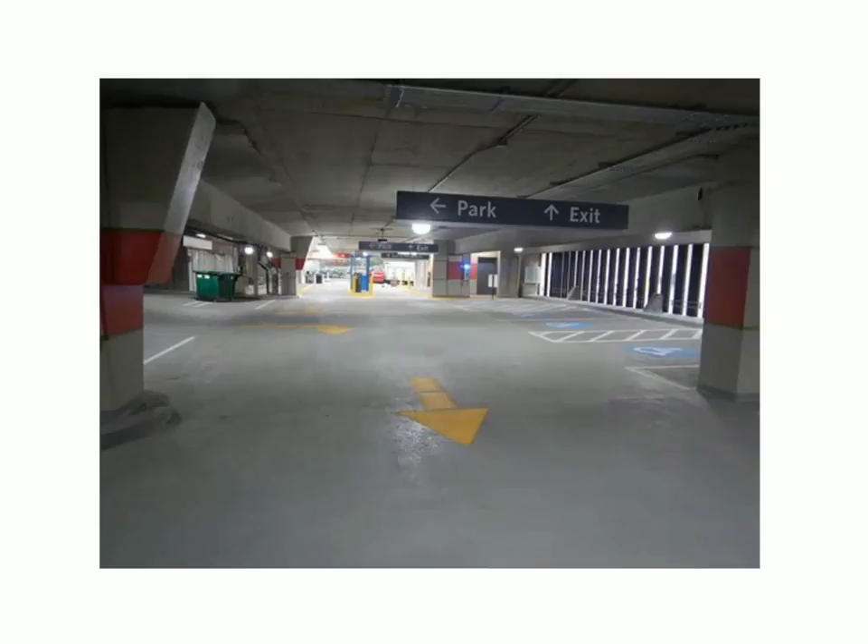The whole project took about 15 months once construction started. It was a very labor-intensive, very complicated project to keep everything moving smoothly for the client and for the contractor. It turned out very well. The client is very pleased. The structure is, from most viewpoints, essentially a new structure. That's incredible. Well, thank you, Russ.

So we did have some questions here that came in, and I know we're running tight on time, but we want to get to as many of these as possible. So, Russ, first one that we're going to hit on here. We looked at a number of parking decks there in the slide. Do you know if any of those have utilized a DCI corrosion inhibitor? And what are our thoughts on potentially preventing corrosion?

DCI, that's basically a calcium nitrite material. It chemically prevents the formation of corrosion. The way that works is, the amount of material that's put in can be defined as far as, under certain corrosion conditions, how long it will provide protection. It does eventually get used up, but it is a very effective, relatively low-cost procedure that can be done.